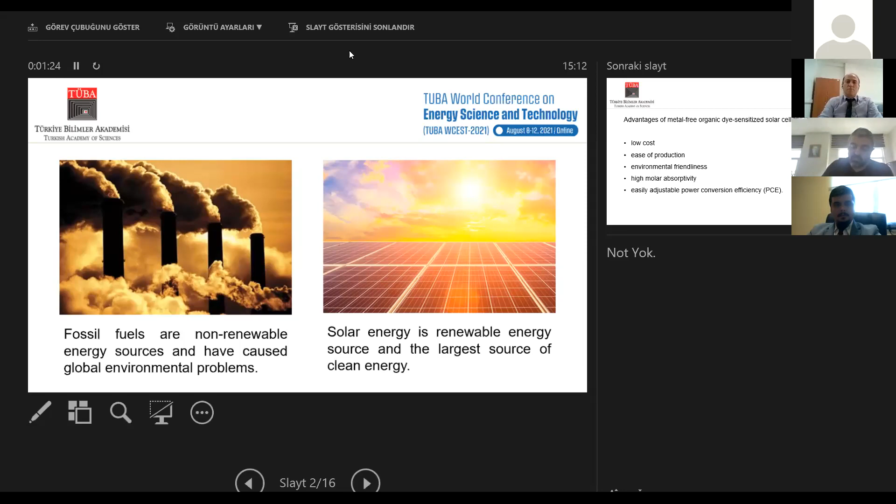For example, using less than 0.02% of solar energy would satisfy our present energy needs. The majority of commercially used photovoltaic panels are based on silicon. Metal-free organic dye sensitized solar cells have low cost, ease of production, environmental friendliness, high molar absorptivity, and easily adjustable power conversion efficiency. Thanks to these advantages, it has attracted attention as an alternative to silicon solar cells.

Conventional DSSCs typically contain 5 components: 1, a photoanode containing a conductive substrate; 2, a mesoporous semiconductor metal oxide film; 3, a sensitizer; 4, an electrolyte; and 5, a catalyst coated counter electrode such as platinum.

The molecular structure of dyes used as sensitizer is one of the main factors that affect the photovoltaic performance of DSSCs. A traditional organic dye is in the form of a donor-pi-bridge-acceptor, and the induced electron is transported from the donor to the acceptor by intramolecular charge transfer.

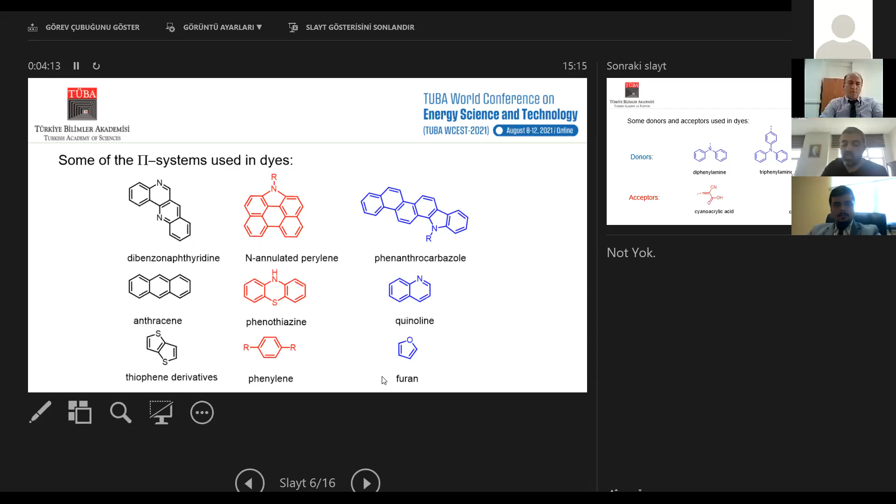In most D-π-A dyes, triphenylamine, carbazole, or diphenylamine electron-rich groups are used as electron-donating groups, and carboxylic acid or cyanoacrylic acid electron-withdrawing groups are used as acceptor-anchoring groups. The strong ester bond formed between the carboxyl group and titanium dioxide surface improves electron conduction.

Zhu et al. developed an efficient and stable new type of organic sensitizer in the D-A-pi-A structure by adding an electron withdrawing group to act as an auxiliary acceptor into the pi bridge of the D-pi-A structure.

In recent years, low bandgap electron withdrawing moieties such as benzothiadiazole, benzotriazole, quinoxaline, phthalimide, diketopyrrolopyrrole have been introduced between the pi bridge and electron donor, and D-A-pi-A dyes have been obtained. It was confirmed that the D-A-pi-A system increased the energy conversion efficiency and photostability of the DSSCs.

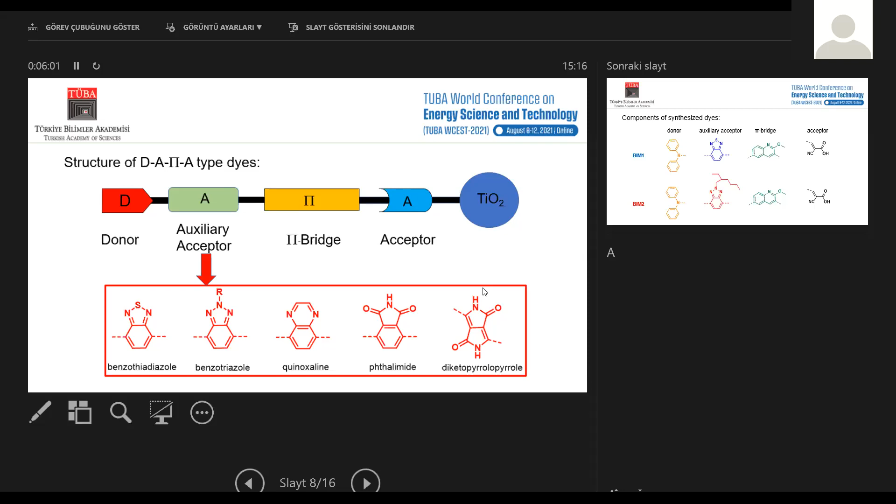In this work, we synthesized 2 dyes containing diphenylamine as donor, benzothiadiazole or N-ethylhexylbenzotriazole as auxiliary acceptor, quinoline as pi bridge, and cyanoacrylic acid as anchoring group. We compare power conversion efficiencies of the DSSCs when auxiliary acceptors are introduced into the structure of the dyes.

The molecular structures of the dyes we synthesized are shown in the figure. As can be seen, the structures are the same except for the auxiliary acceptor group. BIM1 and BIM2 dyes are both in the D-A-pi-A structure.

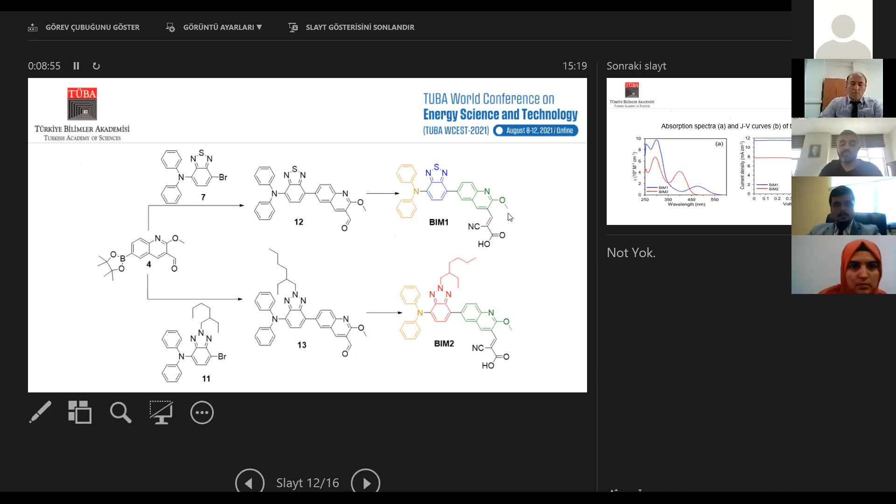The absorption wavelengths lambda max for dyes BIM1 and BIM2 are 476 and 400 nanometers. Remarkable redshifts observed for dyes BIM1 and BIM2 can be attributed to the presence of stronger electron withdrawing benzothiadiazole and N-ethylhexyl benzotriazole moieties on the dyes.

The power conversion efficiency of DSSCs based on BIM1 is much higher than that of BIM2 due to its broader absorption spectrum.

When compared to 5A-, 5B-based DSSCs in D-π-A structures in our previous study, it is seen that BIM1 and BIM2 based DSSCs have both redshifted absorption wavelengths and higher power conversion efficiency.

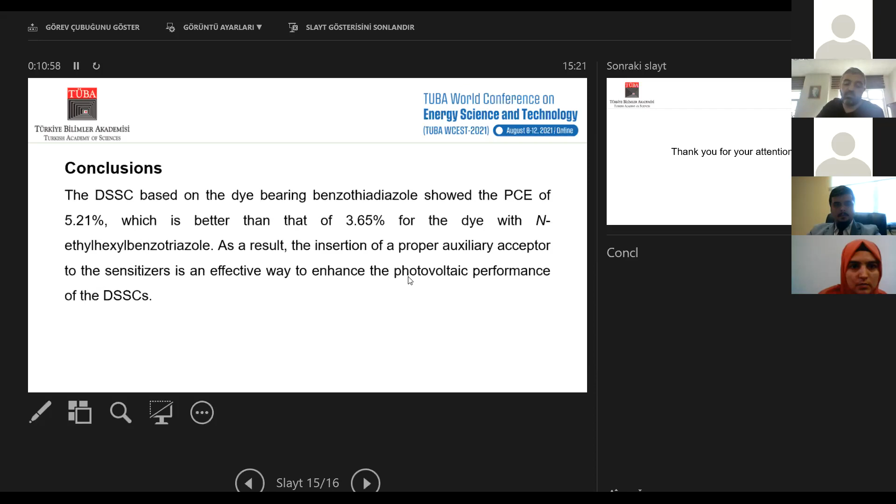Conclusion: the DSSCs based on the dye bearing benzothiadiazole show a PCE of 5.21%, which is better than the 3.65% for the dye with N-ethylhexyl benzotriazole. As a result, the insertion of a proper auxiliary acceptor to the sensitizer is an effective way to enhance the photovoltaic performance of the DSSCs.

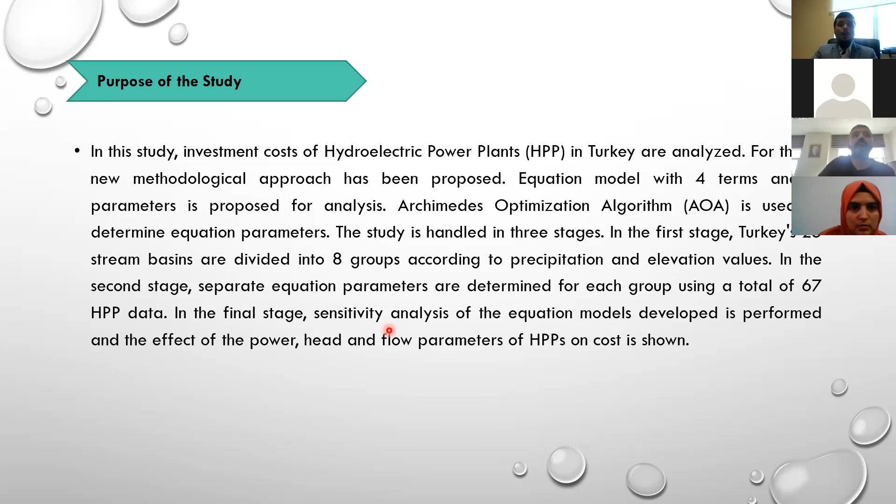In the first stage, Turkey's 25 stream basins are divided into 8 groups according to precipitation and elevation values. In the second stage, separate equation parameters are determined for each group using a total of 67 hydroelectric power plant data. In the final stage, sensitivity analysis of the developed equation model is performed, and the effect of the power, head, and flow parameters of hydroelectric power plants on cost is shown.

There are several reasons for these purposes. One of them is why did we do this study? Because of the importance of the hydroelectric power plant source, and to emphasize the importance of techno-economic analysis of renewable power plants. Current studies are unrealistic, in that electromechanical costs were used in the studies, or some parameters were neglected, or the classification was made according to the turbine type. Because electromechanical costs do not cover the total cost, this can give misleading information. So this study helps to fill the gap in the literature.

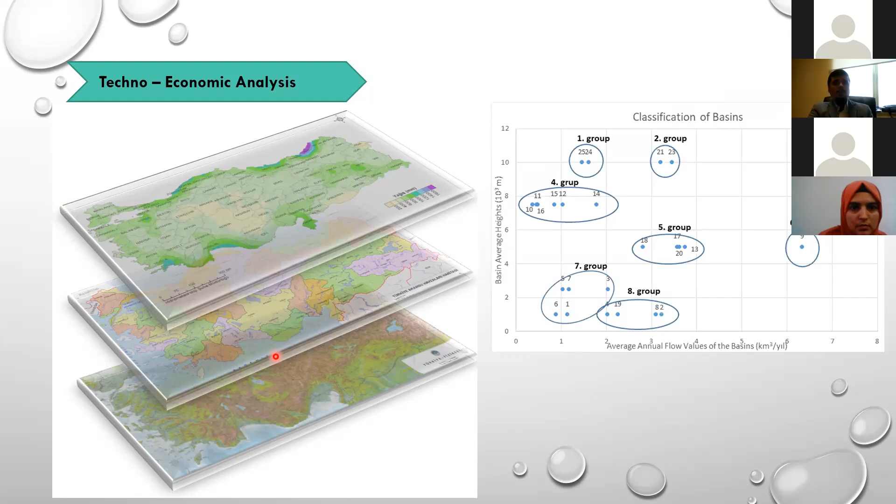The geography of Turkey consists of 25 river basins. When these basins are examined, although they have different river branches, the precipitation and altitude values of some basins show similarity. Taking this similarity into account, river basins are grouped, generally represented in the presentation equation. Turkey's river basins are calculated according to basin altitude and annual precipitation rate, so basins with close altitude and precipitation values are included in the same classification. In this case, there are 8 different classes.

The cost equation parameters were calculated for each of these classes. In the table, values are given as a result of the calculations made. The obtained results were then compared with the literature results.

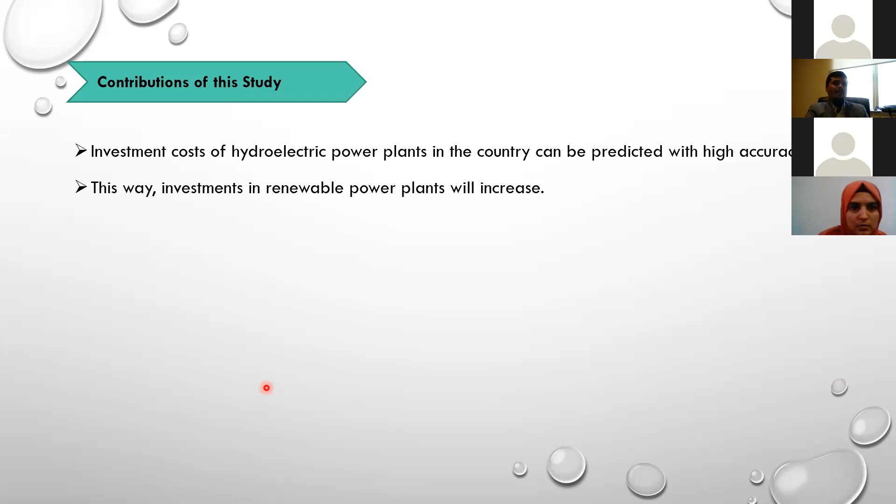The number of hydroelectric power plant data in the data pool can be increased, and parameters used in the proposed cost equations can be added or subtracted, and different optimization methods can be used. Different methodological approaches can be developed, and more tailored cost analysis can be made.

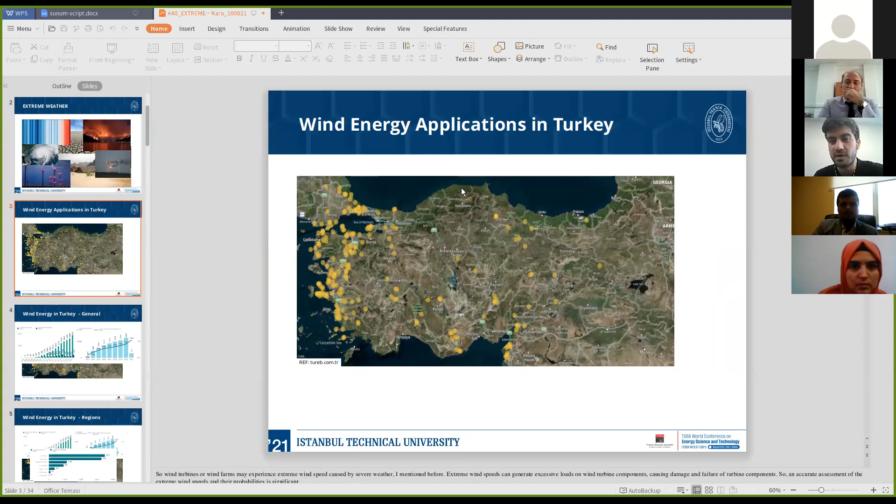Maybe I have some points. In Turkey, I can mention this figure. I took this figure from the Turkish Wind Energy Association's web application, which shows the wind energy applications distribution map in Turkey. The western part of Turkey is really windy, and there is a high number of wind energy investments made there. The yellow circles mean the wind farms. The other parts of Turkey also have wind farms. Okay, I will pass here.

Also, I can mention here the provinces of Turkey - Izmir, Balıkesir, Çanakkale, and Manisa - which have the higher installed wind capacity in Turkey. Izmir has close to nearly 20% of the installed wind capacity. Izmir is in the Aegean region of Turkey. Balıkesir and Çanakkale are located in the Marmara region.

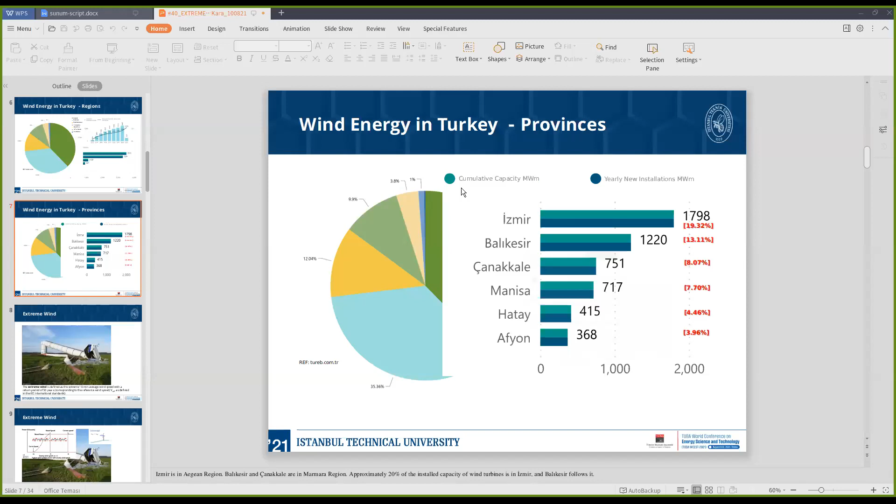The extreme wind is defined in this study as the extreme 10-minute average wind speed with a return period of 50 years, which is also defined in the International Electrotechnical Commission. It is also the standard for wind turbine design.

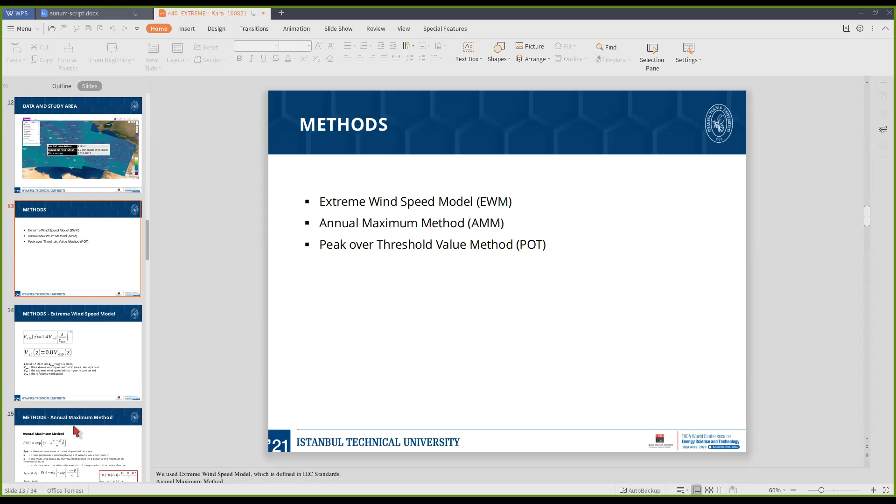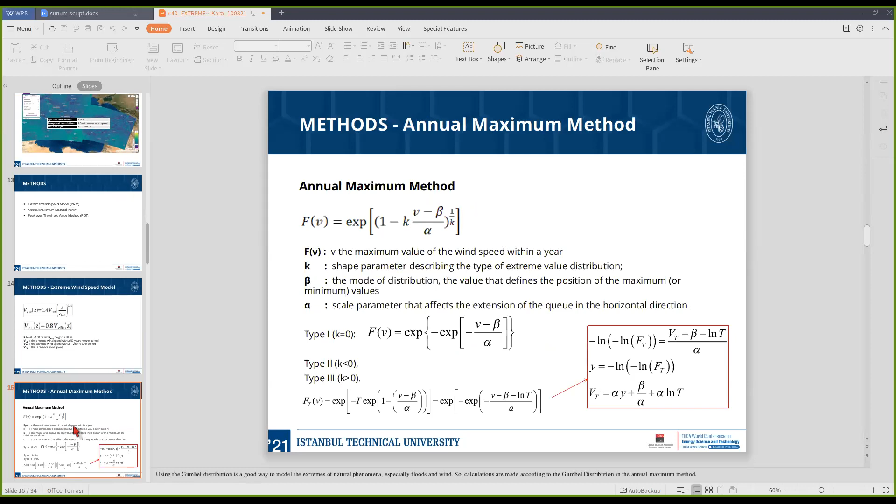The second one, the annual maximum method, using the Gumbel distribution, is a good way to model the extremes of natural phenomena, especially floods and winds. These calculations are made for the annual maximum method using the Gumbel distribution. The risk calculation uses this basic equation, which estimates the probability of occurrence of the return period during the operational lifetime of the wind turbine.

The last method is the peak over threshold method, based on the generalized Pareto distribution. We use this distribution to determine the threshold value. We used our software's functions in this study.

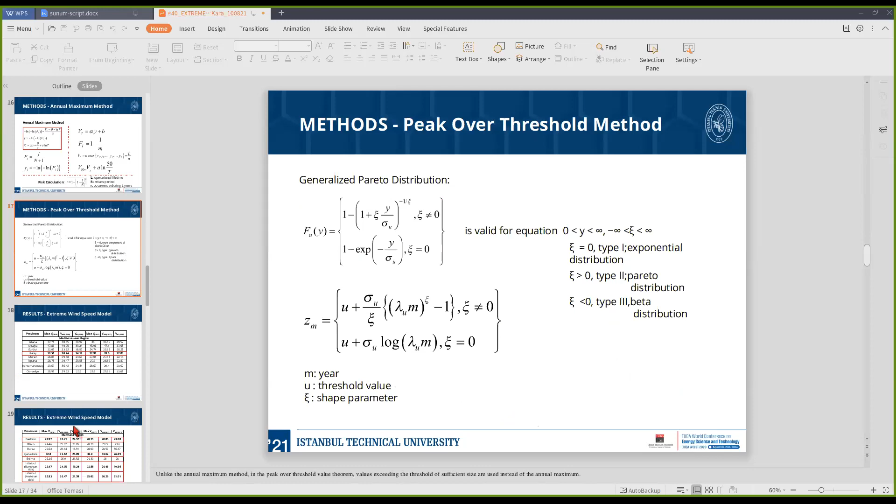Coming to the results of this study, I used the provinces where the installed wind capacity is higher in Turkey. Hatay is one of them. The maximum wind speeds in our data set are nearly 30 meters per second in 2016 and nearly 28 meters per second in 2017.

After the calculations based on that, using the equation I showed, the maximum extreme wind speed with the 50 years return period is 30.24 meters per second, which is below the IEC standard wind turbine class 3, because it's nearly 37.5. So the analysis from this perspective for this model.

Balıkesir and Çanakkale are other cities with high wind capacity. These are also not close to that wind turbine class standard. So selection of the wind turbine is based on these calculations. We can use the third class while deciding on turbine selection.

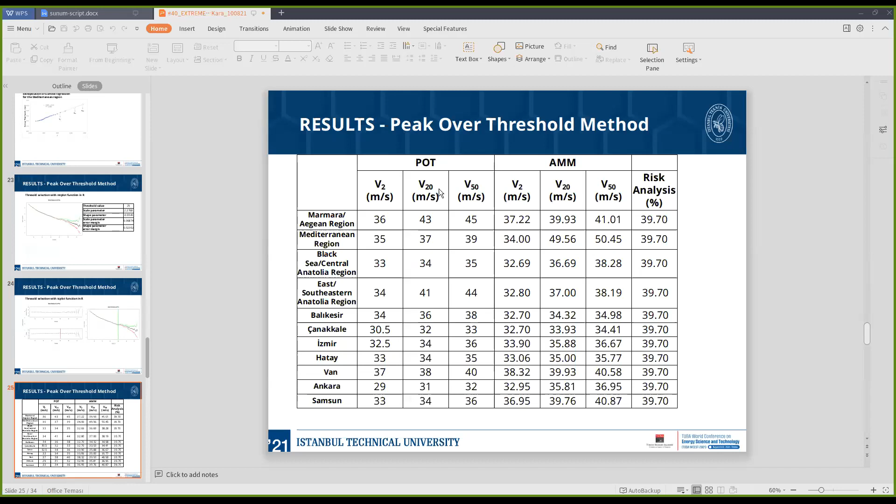But if we examine the AMM method, there is Van, and Samsun exceeds that wind turbine class 3. So if we choose the wind turbine according to these calculations, for Van and Samsun, we need to use wind turbine class 2.

There is a huge number of criteria for selection of wind turbines, of course, but this is a small perspective to understand the basic calculations I mentioned. Okay, thank you.

No, okay, yes, okay. So thank you for the presentation, it is very interesting. Unfortunately we don't have time for questions, but a very small question I want to ask: you have developed this model to select wind turbines, right? How much can this model be commercialized outside in the market? If investors or people dealing in this sector are interested to use your model, how can you make it widely accepted, or what is the problem if it is not?

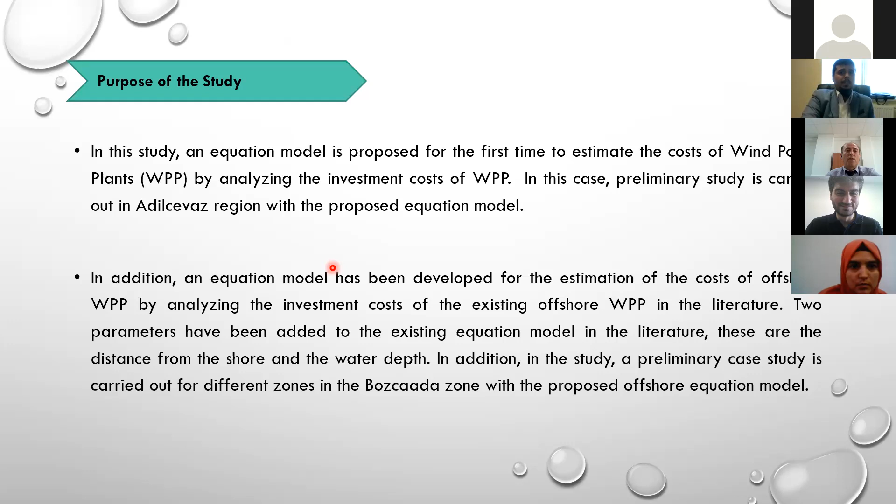In the study, an equation model is proposed for the first time to estimate the cost of wind power plants by analyzing the investment cost of wind power plants in Turkey. In addition, a case preliminary study was carried out in the Adilcevaz region to apply the equation model. The cost of the wind energy farm to be established in the designated area is calculated for different turbine models, and the appropriate turbine model is selected. In addition, an equation model has been developed for estimating the cost of offshore wind power plants by analyzing the investment cost of existing offshore wind power plants in the literature.

For the equation model, unlike the literature, distance from shore and depth parameters are also added. By analyzing the sensitivity of the model, cost changes for different parameter values are expressed. In the study, a preliminary case study is carried out for different zones in the Bozcaada zone to apply this equation model. The cost for different turbine models of the wind energy farm to be established in the determined zone has been calculated, and appropriate zone selection has been made.

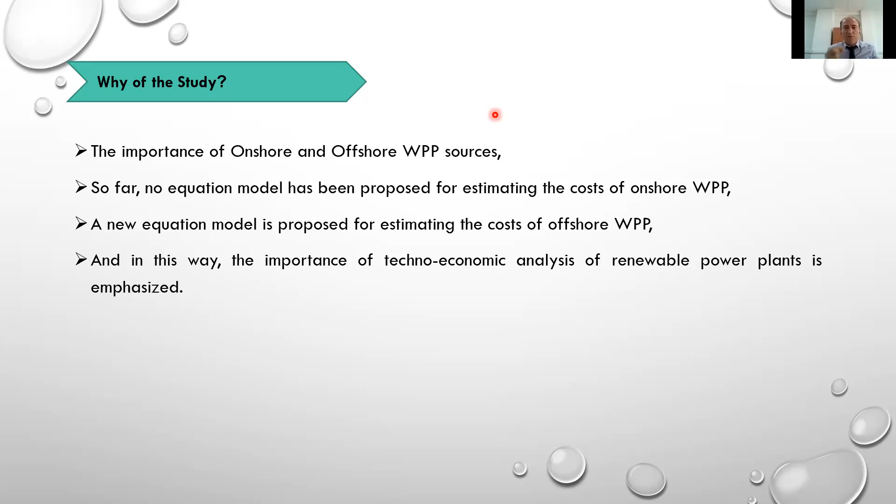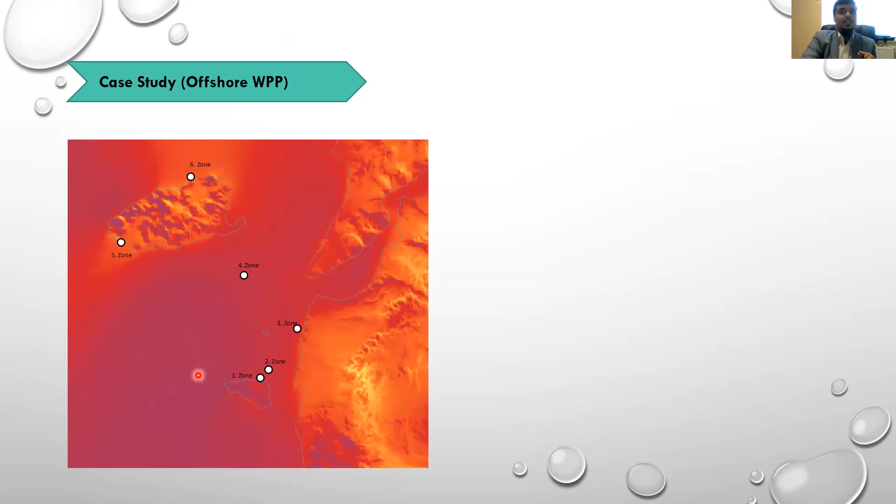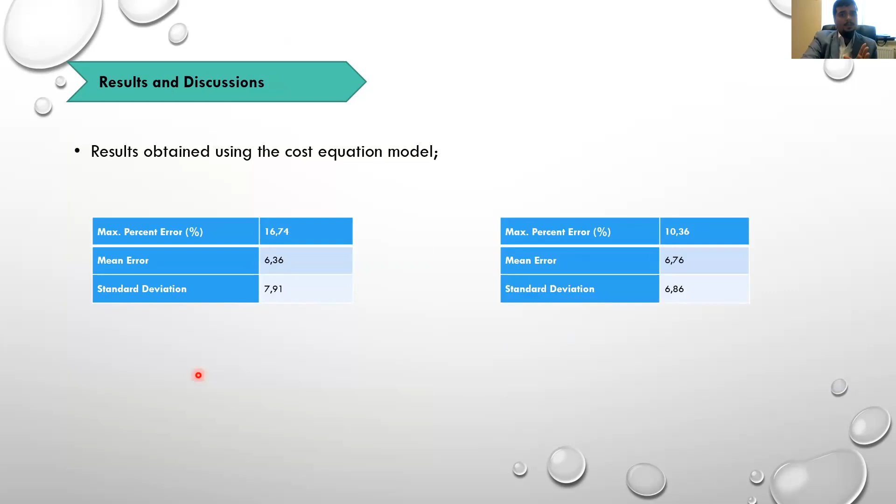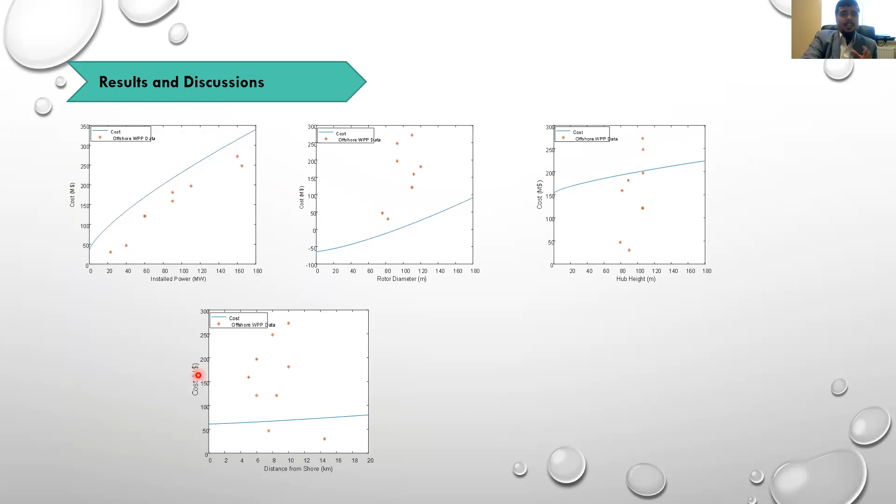In the sensitivity analysis, with the equation, in this study a cost equation is proposed for the first time for onshore wind power plants, contributing to the calculation of cost equation parameters using the Archimedes optimization algorithm. In the case study, calculations are made for the Adilcevaz region.

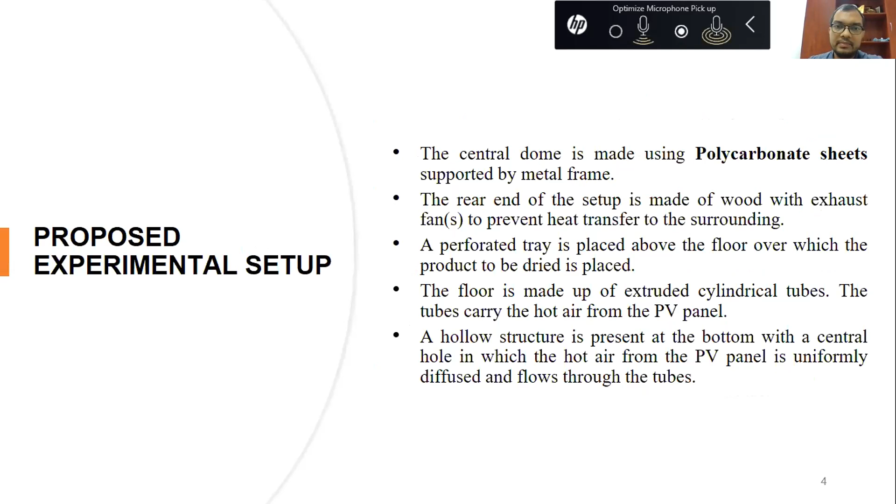This is the experimental setup which already exists, people are working on that, but it is not self-sustainable because we cannot run it in forced mode. So if you want to extract more moisture content, we have to go for some other alternative. What we have done is connect this dome type greenhouse dryer with the PVT collector.

So this is the structure, and here is the PV collector. Why have we taken a PV collector? So that apart from the heat energy, extra heat energy can be fed to this dryer, and we can also run the DC fan. The beauty of the DC fan is that it operates according to solar radiation.

For example, if solar radiation is more, we have more evaporation inside the dome, so we have to take it out quickly from the dome. Otherwise it will accumulate and reduce further moisture evaporation. Due to the PV cell, if radiation is more, it produces more electricity. If you have more electricity, the fan rotation will be more, and it will take out the moisture content at a faster rate. So it is some kind of self-sustainable system.

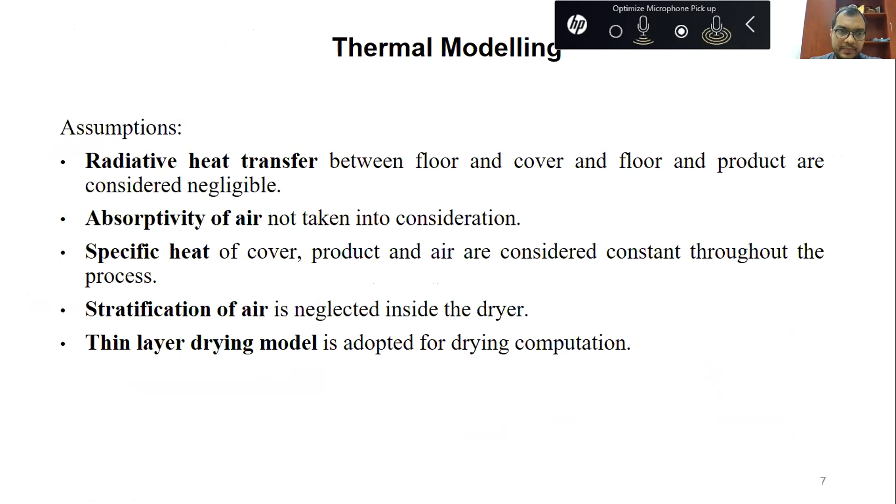According to moisture, it can adjust itself. For that we have done some modeling. First we made an equation for this dome structure, then we made an equation for the PVT collector and connected both of them. Finally we got the results in terms of different temperatures, and from different temperatures we can calculate other energy parameters.

In case one, thermal modeling for the solar dryer: we have done the energy balance equation, then the energy balance equation for air inside the dryer, then energy balance equation on the product, then energy balance on the floor, and the mass balance equation. We have 5 equations which we can solve with the help of a MATLAB program.

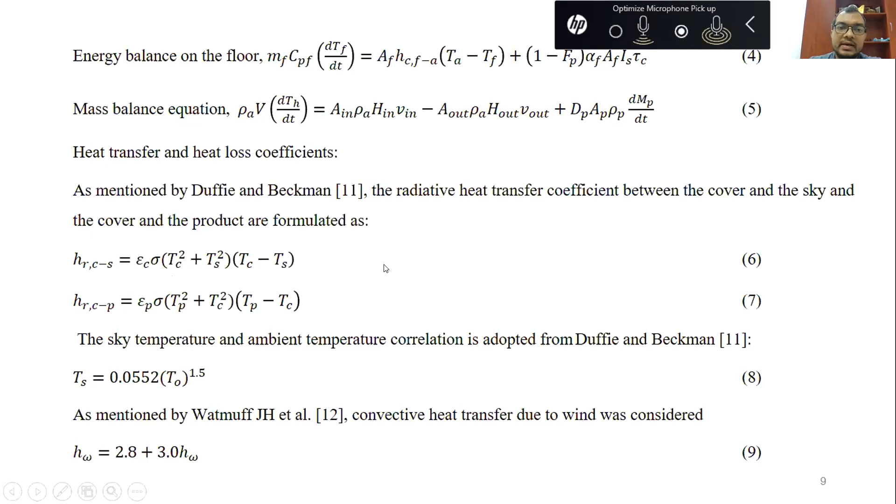To solve this equation we require different heat transfer coefficients, which can be further calculated with the help of different correlations available in the literature. So now we can calculate the heat transfer coefficient, put in the values, and get the solutions.

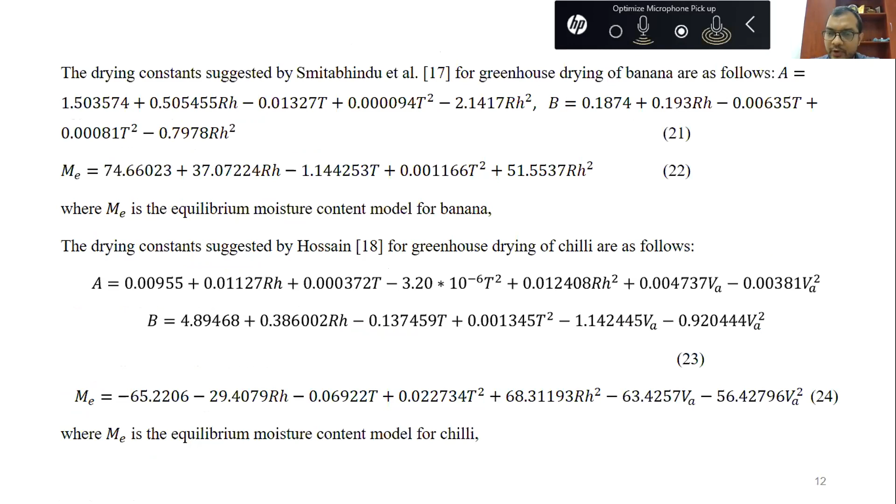For moisture ratio we have different correlations for different crops like banana and chili, and different models. We have taken 3 of these models and compared how the moisture evaporation behavior is going on. Then in case 2, we took the dome structure connected with the PVT air collector system, and this is the energy balance equation for the PVT air collector.

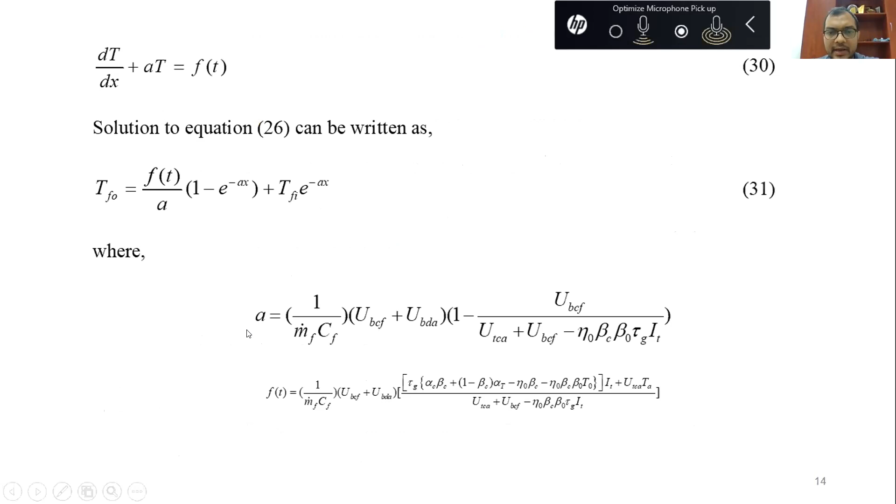Finally, this is the equation for cell temperature. In the same way, we got the equation for the exit temperature from the air collector. This is a first order differential equation which we have solved again with the help of MATLAB programming, and further we can get the different energy parameters.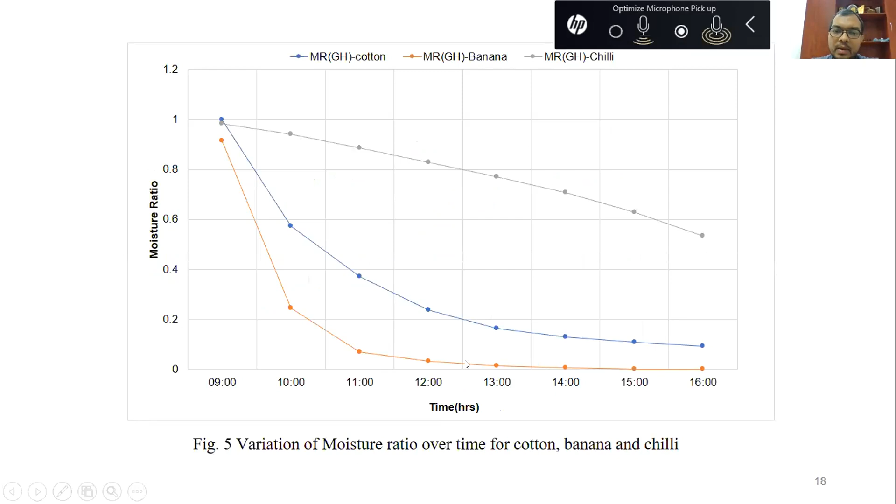What we find is we got around 10 to 15 degree average temperature difference from the ambient temperature when we have taken just the dome structure. Then moisture ratio we have calculated for cotton, banana, and chili. If you see, banana drying takes less time compared to the other two.

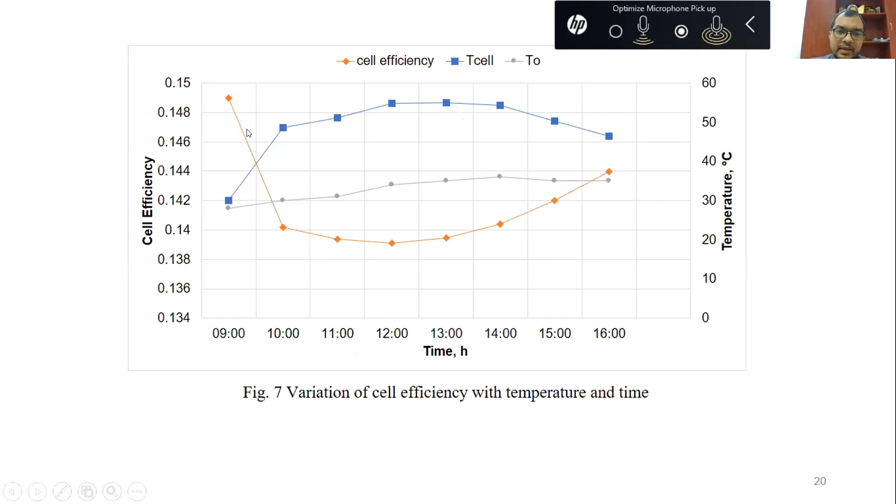Now we have compared with PVT, which we have connected, and we got further around average 15 degree temperature enhancement. So effectively, compared with ambient temperature, the temperature difference is around plus 30 degree average. Also we got a very interesting result: when we have seen the cell efficiency, as the ambient temperature or cell temperature used to increase, the cell efficiency used to decrease.

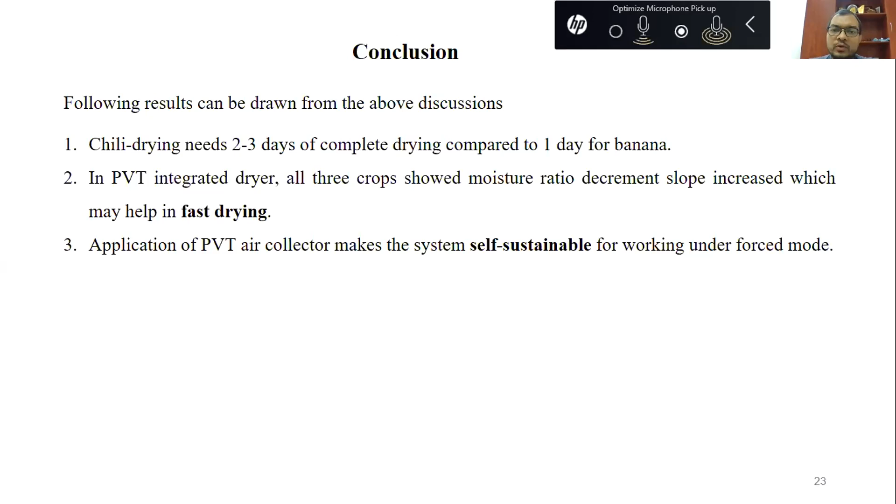In PVT integrated dryer, all 3 crops showed moisture ratio decrement slope increased, which may help in fast drying. Application of PVT air collector makes the system self-sustainable for working under forced mode. Further, we want to extend the dome by putting PCM material, phase change material, so that drying can be used at nighttime also when solar radiation is not available. These are the references, and thank you.

Thank you, Mr. Tiwari. It was a very interesting presentation with the experimental data you employed. Also you mentioned the phase change material, because we had a presentation today about using a PCM for this type of system. Very interesting study, I really appreciate your report and your study. Unfortunately we don't have time for questions. Thank you so much for inviting. No, it was great. We thank you, and we hope to have you in the next events that we will have hopefully. I thank you again.

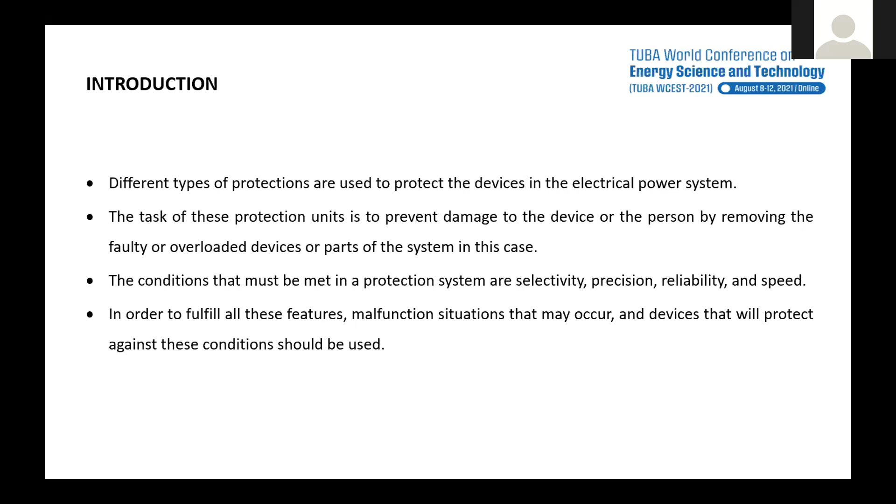The conditions that must be met in the protection system are selectivity, precision, reliability, and speed. In order to fulfill all these features, malfunction situations that may occur and devices that will protect against these conditions should be used.

Recently, new protection systems are needed for the problems of the safety equipment in the power systems in terms of reliability and speed, and for the needs of developing smart grid systems.

In recent years, especially with the development of the smart grid concept, the visible light communication system, VLC, has come to the fore with its reliability, significantly higher data rate, and new generation technology that consumes less bandwidth in data transmission. Highlight of this paper: we improve a smart communication substructure for microgrid systems by using the VLC system instead of radio frequency (RF) systems or power line communication systems.

The main contributions of the paper are summarized as follows. We propose a VLC transceiver system that uses an 8 IPPM technique to provide the data transmission. We describe a data mapping method for fault condition, voltage, and current amplitudes.

In our scenario, the fault detection is carried out at the transmitter side. The type of fault is transmitted to the receiver using a data package which consists of 8 bits. 4 fault conditions, defined in IEEE 929-2000 as over voltage protection, under voltage protection, over frequency protection, and under frequency protection, registered in a package using an improved fault coding method. 4 code streams are generated to define the type of fault.

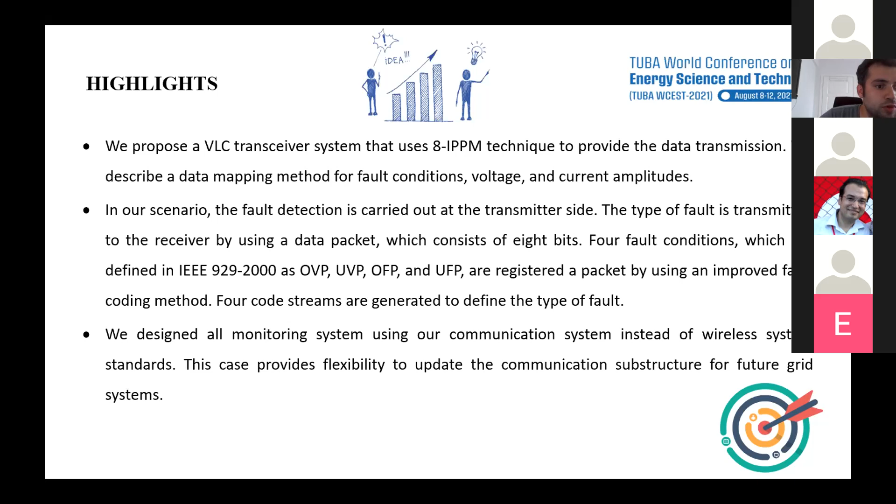We designed the monitoring system using our communication system instead of wireless system standards. This case provides flexibility to update the communication substructure for future grid systems.

In this study, grid voltage and frequency information were obtained in real time via VLC using the LabVIEW software interface developed based on FPGA, using a microgrid processor. The voltage and frequency obtained were experimentally verified with the modulator and demodulator designed based on VLC.

The signals to be transmitted to the circuit breaker were checked with the developed VLC-based system in order to disconnect a system connected to the grid during voltage and frequency imbalances. Thus, an innovative method that enables a communication override, which prevents switching and data losses, has been developed. Thanks to this structure, a technological system has been proposed that can be applied in practice, especially for innovative protection methods required for smart grids.

Background: VLC, visible light communication, is a promising technology for wireless optical communication systems. Compared with radio frequency communication, VLC systems are not affected by electromagnetic interference. Thanks to this characteristic, VLC systems are very appropriate for electrical substations and electrical generation systems where intense electromagnetic radiation is present.

Proposed method: in the test system, the output of the PV system is connected to the grid via a full bridge inverter. Inverter output is filtered and connected to the grid via a circuit breaker. There is a parallel RLC load at the PCC, the point of common coupling. By using the voltage information at the PCC point, the protection process is carried out with the proposed method.

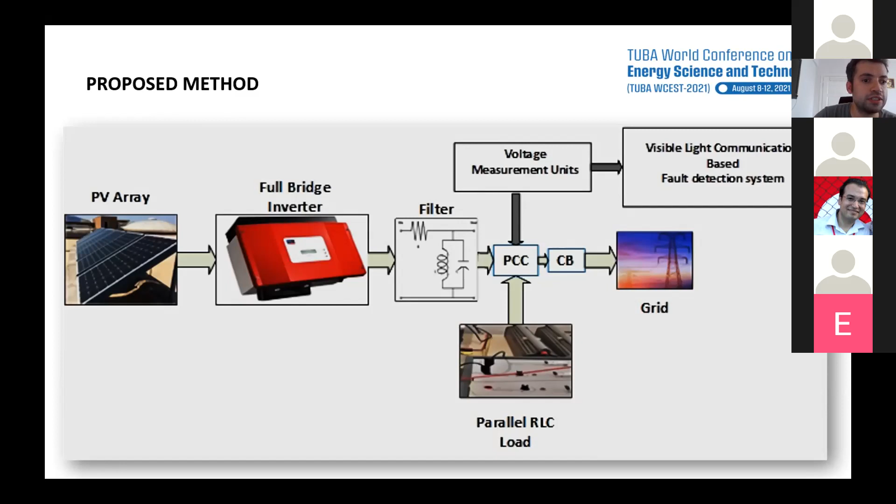The modulation and demodulation of the signal is created with lines of code written in VHDL language. The IP generator block was used in the LabVIEW FPGA part to add the generated code to the interface and upload it to the myRIO card with block diagrams.

In visible light communication, VLC, LEDs are used as transmitters because of the low cost and high energy. On the receiving side, photosensitive photodiodes are used, and regulator circuits are part of these systems.

In this study, four conditions for protection are discussed: first, over voltage protection (OVP); second, over frequency protection; third, under voltage protection; and finally, under frequency protection. These are the concepts of protection. The system tolerance of negative or positive 10% was determined for this study.

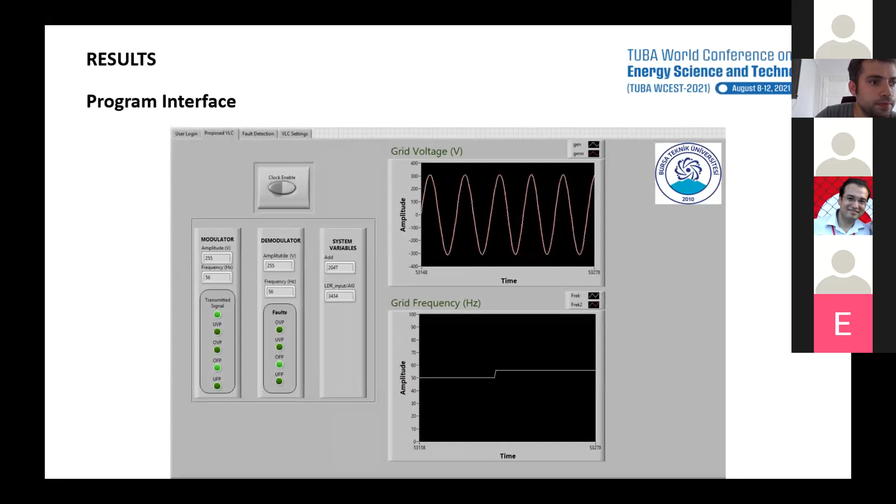The program interface is shown in this figure. For the over voltage protection, OVP condition, when the voltage value exceeds the specified limit value according to IEEE standards, the LabVIEW interface shown here clearly shows the breaker opens when the voltage value exceeds the specified threshold value.

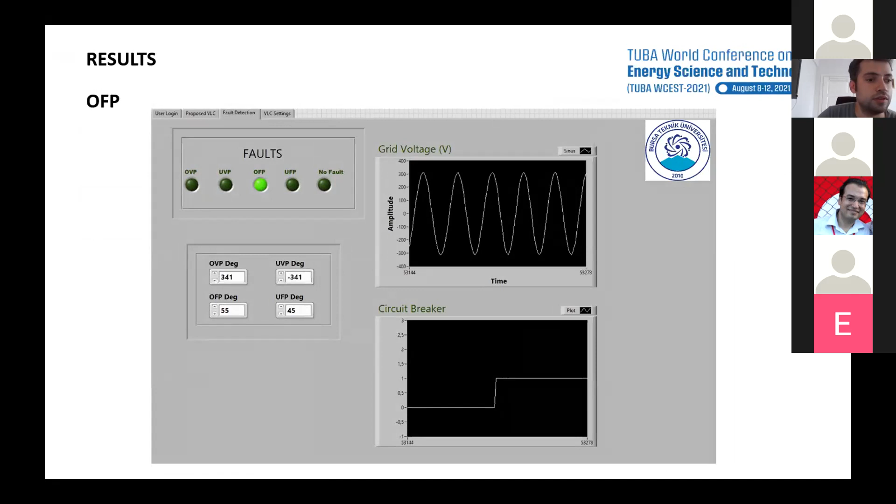For over frequency protection, the LabVIEW interface shown in the figure demonstrates this case: when the frequency exceeds the specified limit value, the circuit breaker opens, and this fault is detected properly again.

In the graph, the part where the circuit breaker is activated is shown as a result of a 10% increase in the grid frequency. The grid frequency chosen in this study is 50 Hz, and it goes to 55 Hz, at which point the circuit breaker opens. This is shown in the table and graph.

In conclusion, a smart breaker with VLC, which has the advantage of high data rate, is safe, has signal isolation and compact structure with very large bandwidth, and consumes less power in data transmission, is proposed for protection in the power system.

Grid voltage and frequency information was acquired in real time with VLC using LabVIEW software, with an interface developed based on FPGA. An innovative method has been developed that provides communication over light, preventing switching loss and data losses. Thanks to this structure, a technological system has been proposed that can be applied in practice, especially for the innovative protection methods required for smart grids.

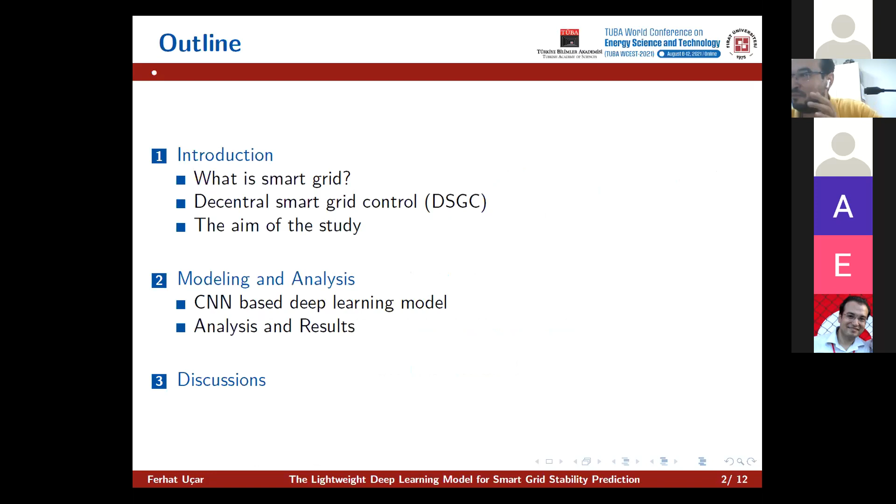This is the outline of my presentation. Because the time is delicate, I'm going to be a bit fast. Thanks for understanding.

First of all, everything goes to smart. Everything has an intelligent side nowadays. It's very famous being a thing with a smart proposition or smart adjective. And also our electrical grid needs to be smart, because a smart grid, first of all, is a state-of-the-art power grid framework, and it also manages renewable energy source integration, and allows electricity flow in both directions. Today everything is different from yesterday. Consumers also produce electricity and sell it to production companies, giving their energy to the grid, and the management of the energy is very important. The smart grid takes the scene at this time.

First of all, I would like to draw your attention to grid stability. What is grid stability? The first thing that comes to mind is there is an equilibrium between production and consumption. We have to provide this. Because electricity cannot be stored in the transmission grid, we have nowhere to store it. So the amount of electricity fed in must always be the same as the amount fed out. This means production and consumption of energy must always be balanced, and we understand this from the value of the frequency. The primary control in our power plants is made through this frequency control.

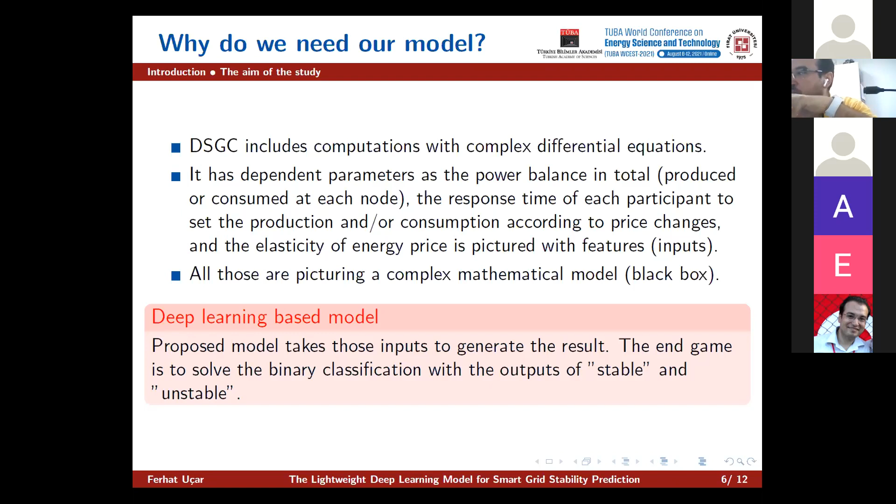Our proposed model includes a lightweight convolutional neural network. Why do I determine it as lightweight? Because it's built from scratch. It's a very easy structure to build, and it's not pre-trained. It does not use pre-trained networks, because those have very heavy computational costs. Our contribution here is building a lightweight

convolutional neural network, which we'll call CNN from now on, to design a lightweight CNN to predict smart grid stability. This deep learning based model performs well in this stability assessment, using a comprehensive smart grid stability public dataset, which helps us picture the performance in a good manner.

The CNN model is very simple and built from scratch, as I said. It has only one convolutional layer and fully connected layers at the end, and it just makes the prediction of stable or unstable. Generally, CNN is known for using 2D images, but here we designed a 1D form of it, because it's a 1D signal, not image processing.

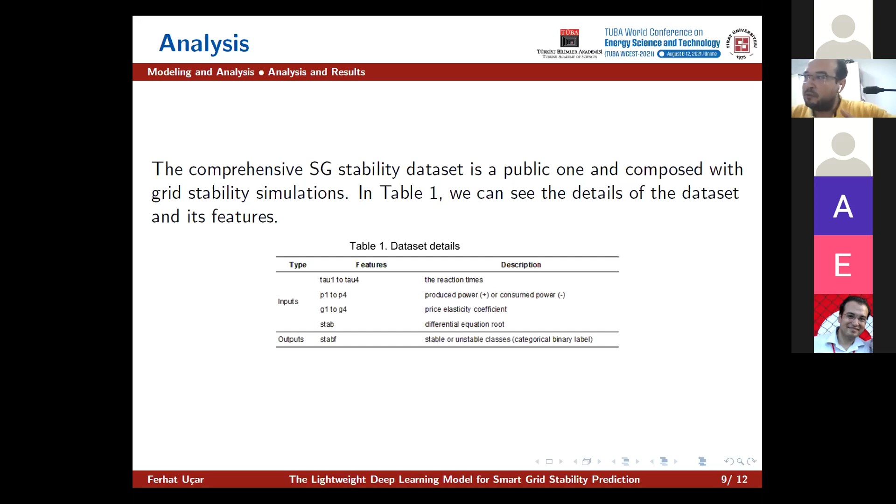So our deep learning based model learns the black box. We don't know the complete complex computations in it, and we shouldn't need to know it—our model learns it. This is the classic neural network logic, as everyone knows, and our output is the smart grid stability prediction.

When it comes to results, the experimental analysis was done in Python, using the PyTorch package, which has automatic parameter tuning built in. The performance evaluation metrics here are accuracy, sensitivity, specificity, and precision, and also

F1 score as our last evaluation metric. You can see here it reaches very good performance values—accuracy, sensitivity, specificity, precision, and F1 score all close to 1.

As a conclusion, our proposed model reached an accuracy value near to 1, the maximum value, just using a lightweight 1D CNN structure. In the extended paper, you can see we had a benchmark study that reaches nearly our results, but with a complex classifier model. Our model is very simple and very cost effective.

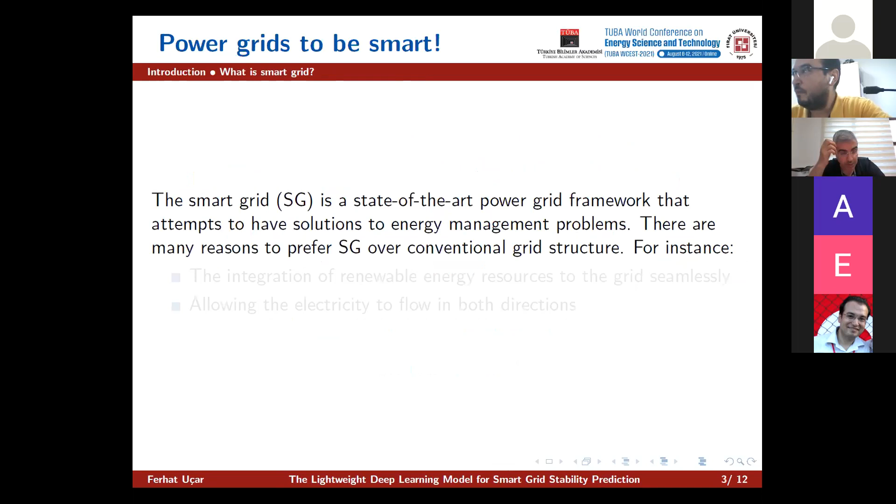I have one question, actually. When you were presenting at the beginning about the balance of the power system, as you know, the balance can be divided into two main parts: one is the frequency balance, the second is the voltage balance—I mean the active power balance and the reactive power balance. In your model, did you consider both, or did you just use one of these? Did you consider both?

I don't consider the power side, actually, because the public dataset is ready to use, and they made the experiments considering the voltage stability and the grid stability, the bigger picture, generating the outputs according to their inputs about nodes.

And so I'm restricted to these data sets, and I don't consider the reactive or active power, I mean frequency stability and the voltage stability. Did you consider both? Okay, then you use both active and reactive power stability as well. Okay, relatively. Yes, I see. Thank you, Ferhat.

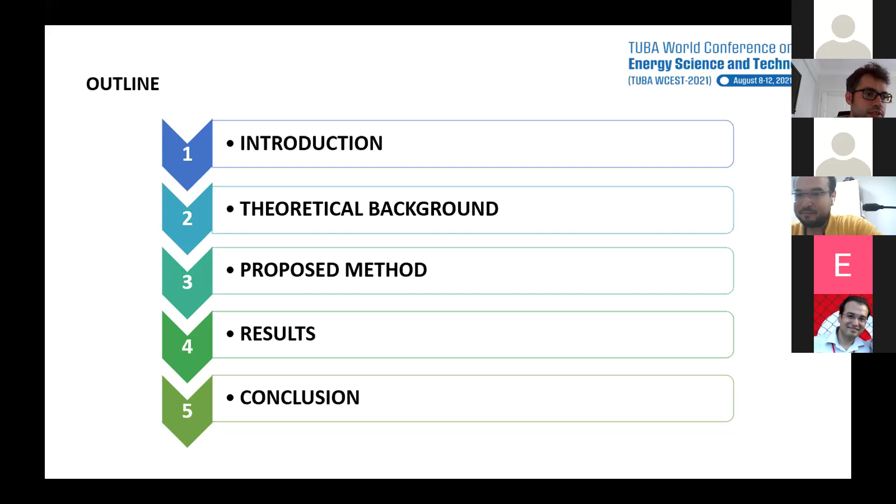Sustainable power flow is required for both the consumers and grid side to provide a reliable grid integration, especially in microgrid structures, for example SOFC systems, PV systems. Especially on the production side, there are renewable energy sources such as fuel cells, wind turbines, grid-connected photovoltaic systems. On the consumption side, there are loads such as electrical vehicles, fuel cells, nonlinear loads, and their number is rapidly increasing also. This situation brings important changes in the traditional grid structure.

Among the renewable energy resources, fuel cells stand out with the development in recent years. The integration of hydrogen energy-based systems, for example SOFCs, whose number is rapidly increasing, and its effects on power quality have become an important issue.

Highlights of our method: a new modified weighted majority voting mechanism is proposed to classify complex power quality disturbances in hydrogen energy-based systems in the literature for the first time. Different deep neural network models are used for classification: deep convolutional neural networks, deep long short-term memory, and its hybrid model. There are 3 models investigated in this study.

Existing machine learning methods are compared with deep learning and our proposed method under noisy and noise-free conditions. The classification accuracy under low level noise and high level noise conditions is respectively higher than the other methods in the literature.

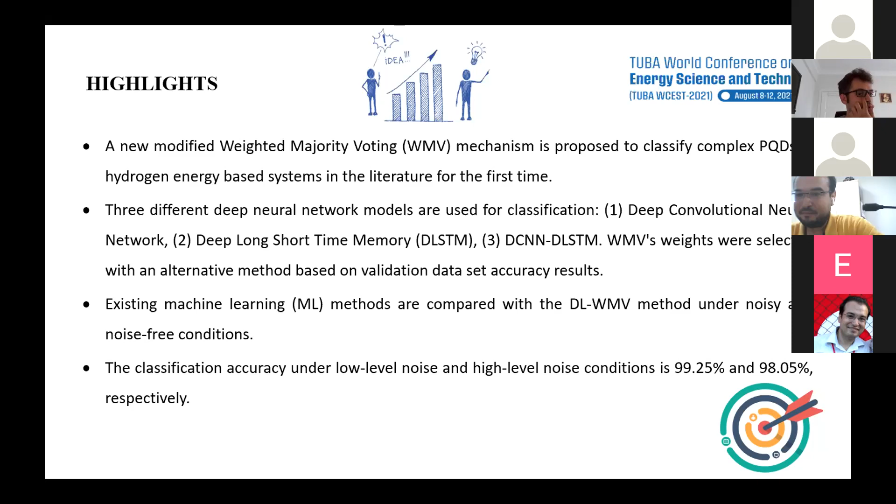In previous studies, automatic identification of power quality disturbances was divided into 3 stages: signal analysis using time frequency analysis methods, for example Fourier transform, wavelet transform, S transform, Gabor filters; feature selection using optimization methods; and event classification using multi-class classifier. There are 3 stages.

Power quality is directly related to voltage and current characteristics, and a problem that leads to deviation from the ideal waveform is called the power quality disturbance. The problems occurring in hydrogen energy-based microgrids show similar features to conventional systems. However, these events in these applications are more challenging to identify than in traditional power systems.

As with conventional systems, short circuit faults, large power loss, and large capacitor banks will lead to transients, sudden current and voltage rises, voltage fluctuations, and harmonics in the microgrids. On the other hand, some situations cause power quality disturbances specific to microgrids, such as enabling or disabling distributed generators like solid oxide fuel cell systems, PV systems, inverter control strategies, operating mode switching, and the presence of nonlinear loads.

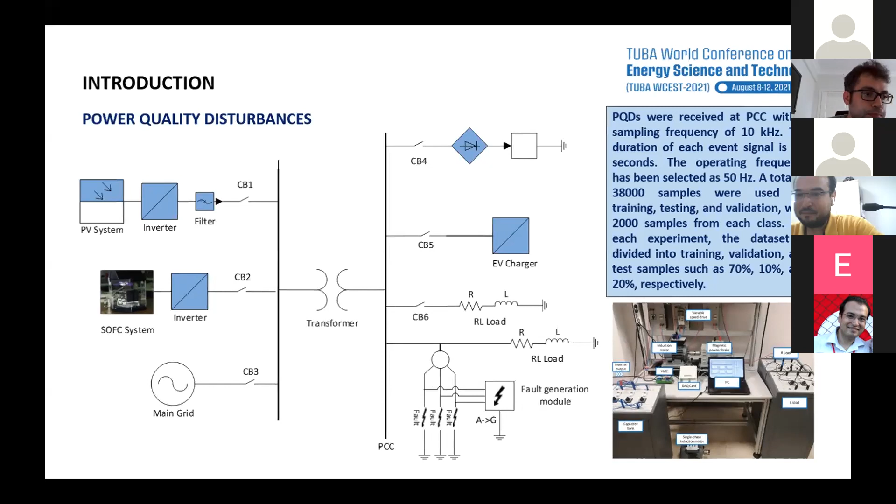For theoretical background, we use 3 models. The first model is the deep CNN model. Several models have been formed in this work by changing various parameters such as ordering layers in the deep CNN structures, filter dimensions, activation functions, kernel dimensions, and optimizer functions.

The long short term memory models are a type of recurrent neural network, called LSTM. LSTM models are designed to overcome the vanishing gradient problem. Models using multiple LSTM layers are called multi-layer LSTM or deep LSTM, which we call DLSTM in this study.

What are the differences between our method and conventional classification methods? Conventional automatic identification methods of power quality disturbances generally have 3 stages, and these design analysis methods have heavy computation burden. Besides, these methods are prone to being affected by noise signal, and the optimization process of feature selection is complicated and time consuming.

In this study, a hybrid model using a multi-class classifier with the 3 models we investigated is shown in the flowchart figure. We use 2 voting methods: the classical voting method, and the second one, weighted majority voting method, our proposed method. Weighted majority weights were selected with an alternative method based on validation dataset accuracy results.

For every classifier, we analyze the classification accuracy rate for every class, and the most confused classes for every classifier are determined. For these classes, the weights of the classifier are decreased. Also, weights are increased for the best predicting classifier.

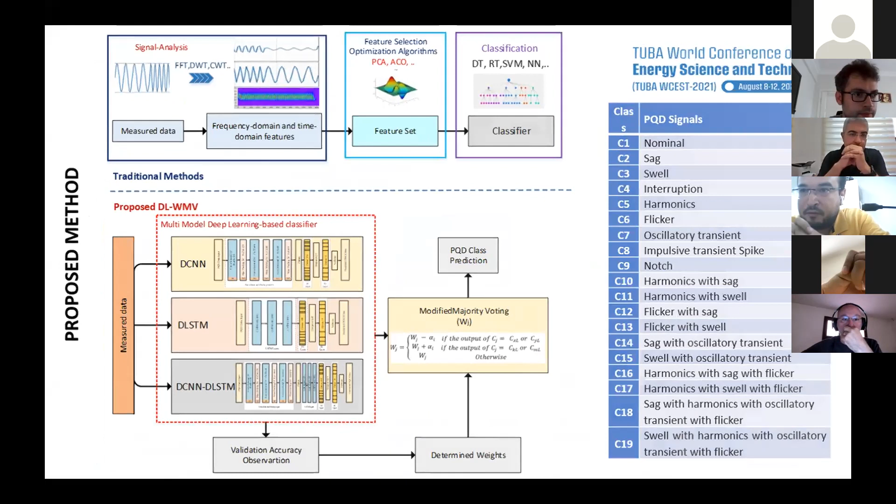Did you convert them to image or just reshape the signal? Just one signal, not image. I saw that you used 2D CNN construction, so you're supposed to have converted them. Maybe this is an error, we use 1D signal. In the figure, I saw 2D, and I thought you reshaped it. That may be 1D, sorry for that, this must be 1D. Yeah, I thought you were reshaping them.

And my last question is... thank you for your attention, sorry for that. Is the proposed model a bundle model? I mean, it includes 3 types of classifier. You use both of them, and yes.

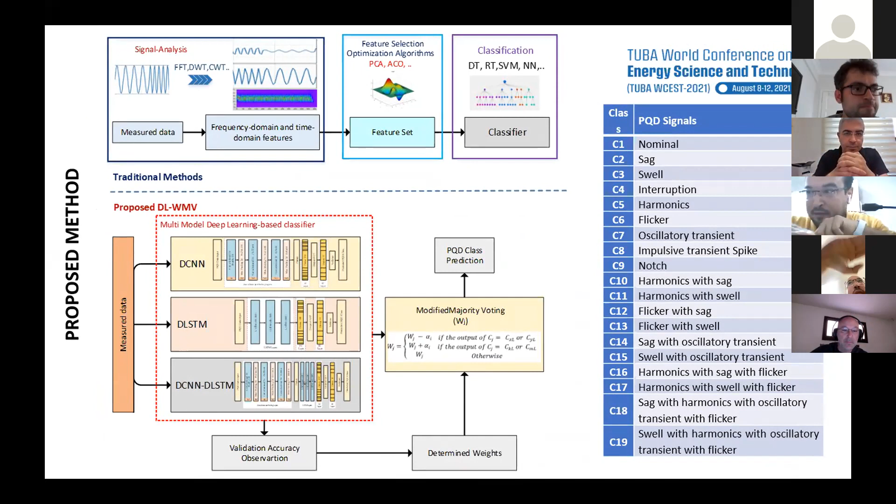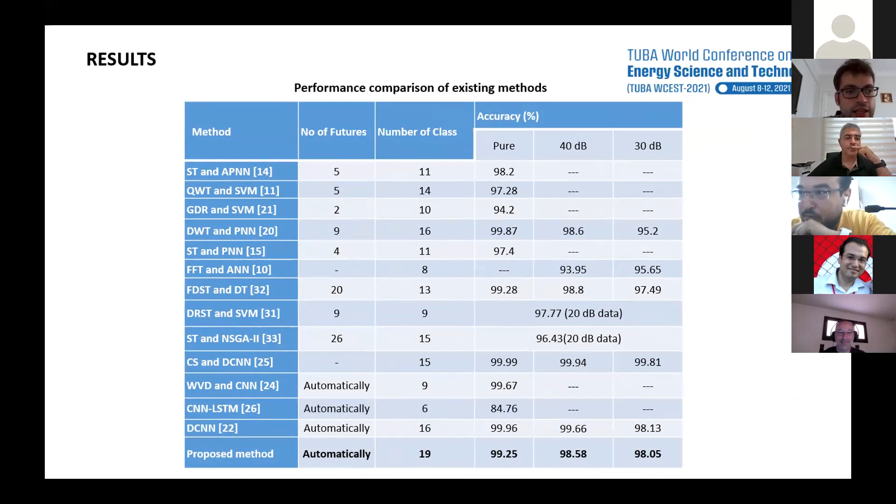I think your algorithm runs all of 3 models and takes the maximum, the winning model. I don't understand that. Yeah, we use validation accuracy rate for each class, and we choose the best predicted classes and most confused classes. For example, deep CNN neural network has the best accuracy, we use it, or if DLSTM has best accuracy, we use it. Winner takes all.

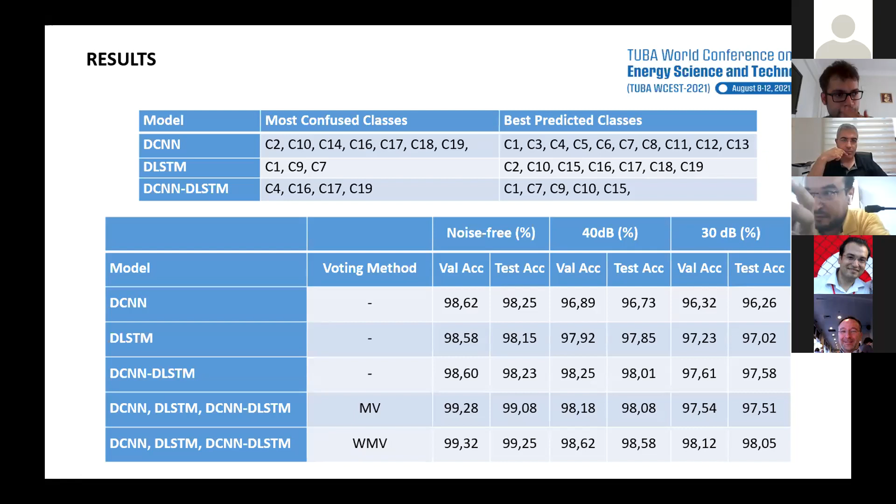Winner takes all, yes. The coefficients decrease and increase, we choose the best one, and that one classifier is applied to the signal. So when you give the final model to the end user, the algorithm gives all 3 models and says run all of these 3, and our algorithm, but the perfect one is selected for classification accuracy.

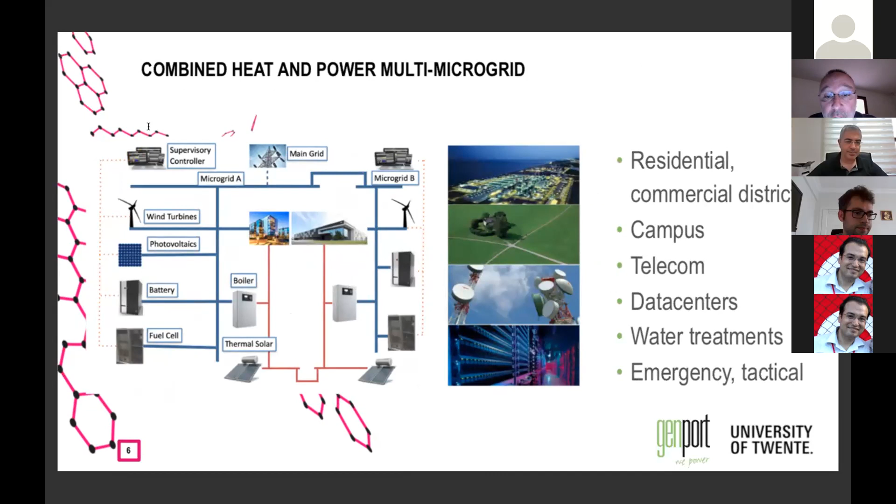Where these two microgrids can exchange energy, and my aim is to study this type of technology, finding if there are best configurations, best fitting to find a large application in the future in many industrial and commercial applications.

However, as we know, microgrids are a challenging technology. In order to find the best sizing, the best configuration, the best location, you need to overcome and solve many challenges and find the optimal configuration among the quality of energy, the norms, the reliability of the grid, and so on. So you need high computing resources to obtain an answer to this problem.

In my work that I will explain, I've basically focused on finding an optimal design and sizing of microgrids and operation simultaneously.

And as a fitting estimator, I utilize the internal return rate combined with levelized cost of energy, that returns a ratio between the total cost of ownership and the energy generated by the microgrid.

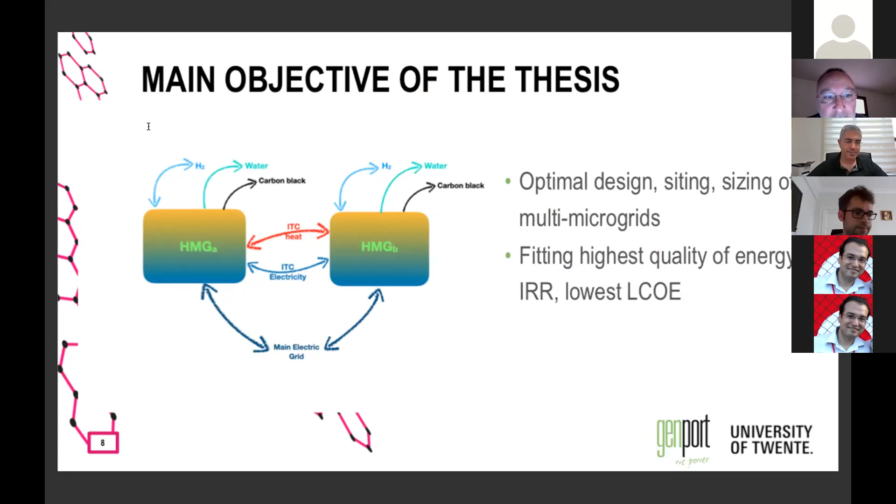And as products that are exchanged among the microgrid and the main grid, we consider electricity, heat, but also hydrogen, which can be produced on site, and other byproducts like water that can be generated by the fuel cell, or carbon black that can be utilized by a thermal plasma decomposition system.

So the overall configuration is shown in this picture. On the red line are interconnected different distributed energy resources like solar panels, wind turbines, fuel cells, battery energy storage systems, and heating systems like electric boilers, heat pumps, thermal collectors, and so on.

And they can exchange energy between the two different thermal and electric microgrids to find the best optimal energy cost.

One moment. Okay. Now, to solve these complex problems, I developed a novel two-layer optimization algorithm.

At the upper level, a new evolutionary algorithm supported by a machine learning algorithm delivers a trial setting of configuration, sizing of distributed energy sources, and best candidate locations.

And the lower level utilizes these settings to estimate the optimal energy balance at the minimum cost with a sequential least squares algorithm.

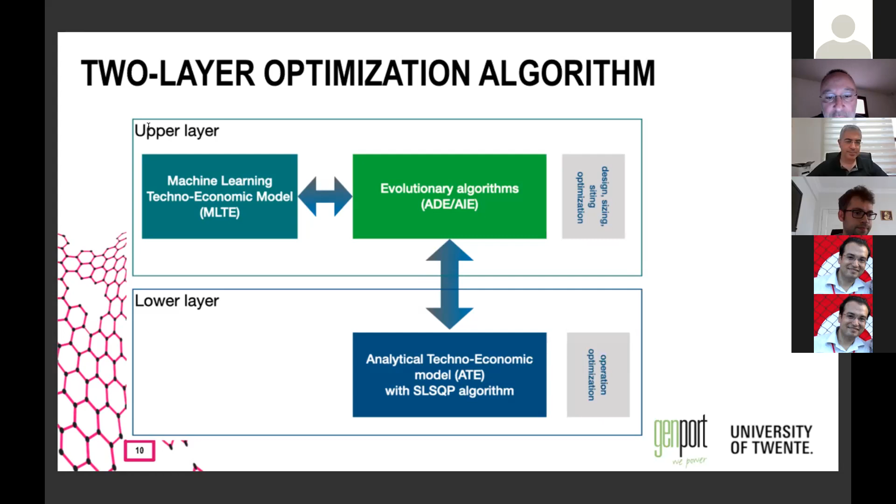The objective equation for the lower layer is a combination of the revenue stream and the cost. So I need to minimize these functions by balancing the energy flows every time step, while the fitness function for the evolutionary algorithm is a combination of the actual levelized cost of energy and the internal return rate.

The most interesting aspect of the evolutionary algorithm is a novel technique for the development of mutant and trial solutions. I've been inspired by the COVID era, by how the immune system reacts against antigens.

So basically, the mutant evolving strategy is always managed by the diversity of the population of solutions, while the crossover recombines the mutant with target vectors using two different techniques.

The traditional vertical gene transfer, and the most unusual but existing in nature, horizontal gene transfer, that combines a piece of genes, like coming from a virus, into an existing genetic genotype.

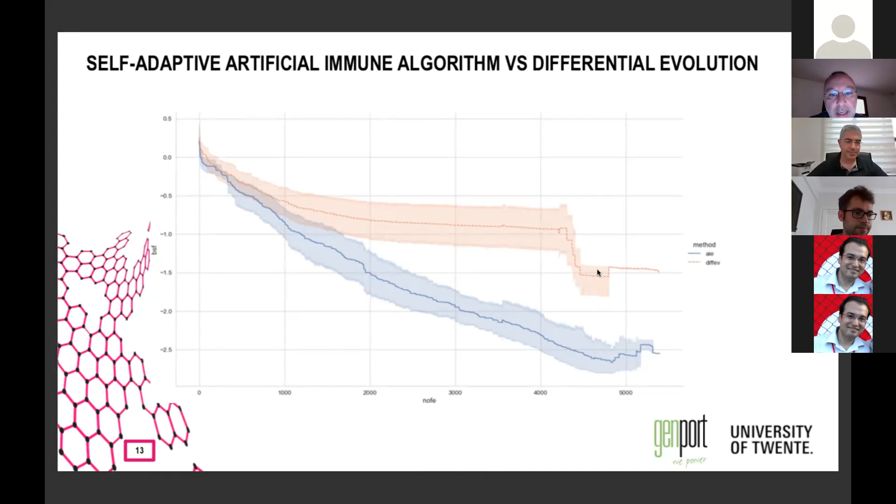Now, this algorithm has been utilized for explaining different scenarios that I studied, based on two different price policies for the energy exchange and product selling.

The so-called high policy, a scenario where the energy cost is a little bit higher than today, and the low policy, where the energy cost is like it is today.

The first scenario that I want to introduce is the advantage of interconnecting the two microgrids.

The mix of distributed energy resources optimized here is a combination of renewables, mainly fuel cells, and the main grid.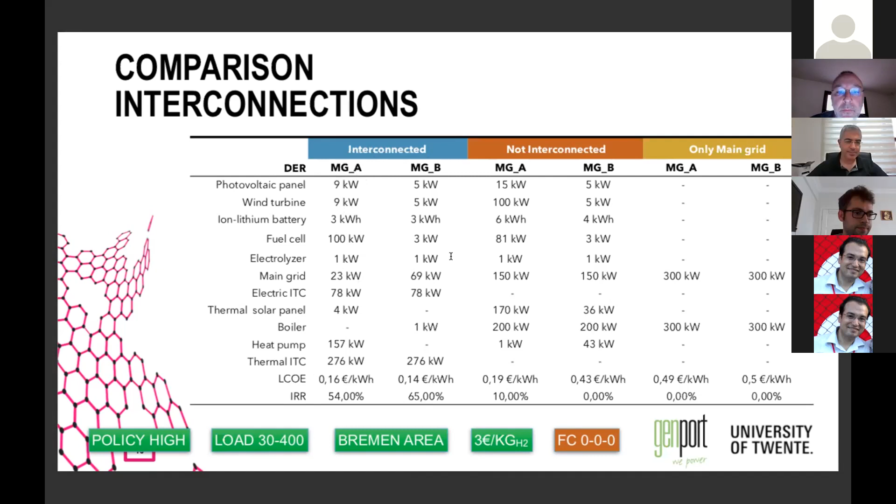In a second scenario, it's been shown how the price policy of hydrogen can have an impact on the overall configurations and results. Here you can see that with €3 per kilogram, it's possible already to obtain a very high internal return rate in south of Europe, in Catania, while in Bremen a similar result can be obtained with €1 per kilogram. Again, a good combination is obtained by combining photovoltaic and wind turbine with a fuel cell.

And the electric grid is always utilized to provide an energy demand response to the main grid. A third scenario analyzes which is the best siting, off-grid and on-grid, for both North Europe and South Europe. It has been found out that one of the best candidate areas for multi-microgrid is in north of Denmark, while for South Europe it's the east part of the Mediterranean Sea near Greece.

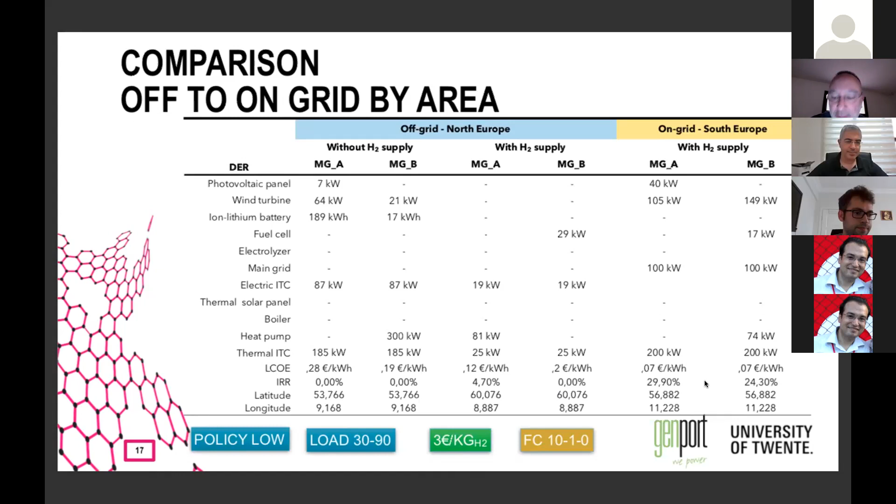Again, the best results are obtained in South Europe, where the efficiency of renewables is higher than North Europe. Finally, the fourth scenario compares technical economic results using green hydrogen, meaning hydrogen coming from a large wind farm, or blue hydrogen that can be produced on site with thermoplasma decomposition technologies. This latest technology has an advantage: it is quite green and can also produce carbon black, a good high quality product that can be sold to the market.

The results show that although green hydrogen is always the leading solution in terms of financial performance, blue hydrogen can be a bridge technology until green hydrogen is available for microgrid.

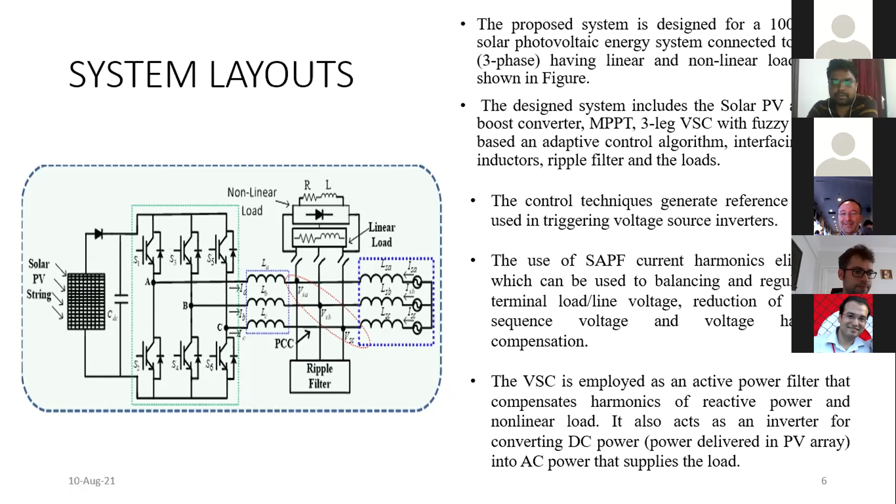Now I will talk about the adaptive control system. This is also integrator based, used to remove or eliminate harmonics from the load side. Basically, this is the adaptive control scheme shown in this figure. This is a basic control system which can be solved using a simple block set, MATLAB block set, or simple calculation.

Through that we can calculate the IFA for current extraction from the phase, this is for phase A. Similarly, we extract current from phase A, phase B, and phase C, since we are talking about a 3-phase system. Then we use one-third of all this current. Then W1, W2, W3 we take as the in-phase component, and WPA, WPB, WPC are the out-of-phase components. All these feed-forward components are used for dynamic performance improvement.

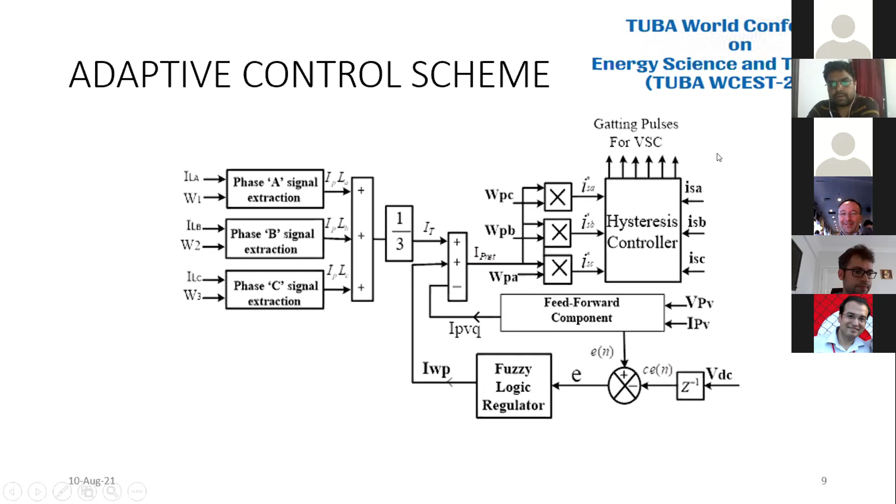Fuzzy logic controller is used basically for loss estimation of the VSC. With that we get the current ISA star, ISB star, ISC star, which we compare with the source current or grid side current for generating the voltage source converter signal. So we use the fuzzy logic controller for loss elimination in DC bus voltage, and to adjust quickly to the reference voltage. The DC bus voltage is obtained from the MPPT controller.

These are the simulation results under variable irradiance. You can see the irradiance will be around 700 kilowatt per meter square, then after 0.4 second it will increase to 1000 watt per meter square. We can see the grid DC bus voltage is almost constant. The feed-forward component is increased correspondingly. The PV power will be increased, the current will also be increased, and more importantly, the grid voltage and grid current will remain constant.

This grid current will reduce as the solar irradiance increases. This is the compensating current, this is the load current nature. We can see this is the grid power, and we can see the active power, and the last one is the reactive power, which is almost zero. That means the power quality will be improved, with good power factor.

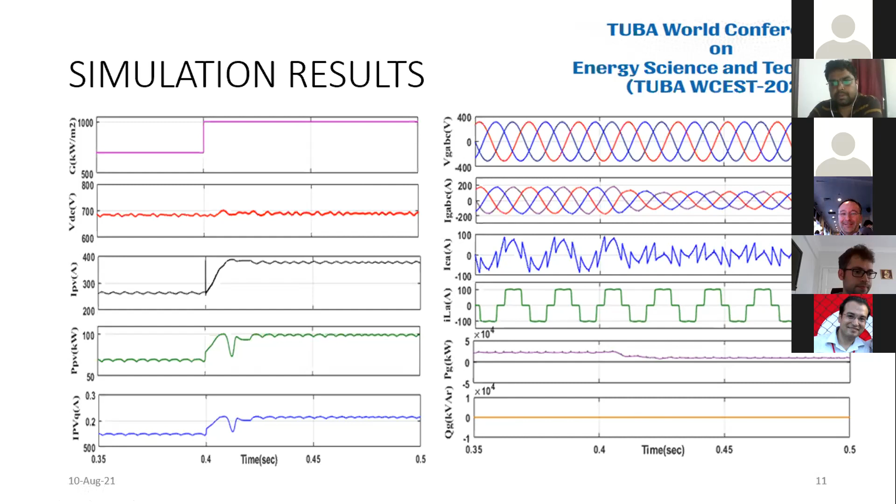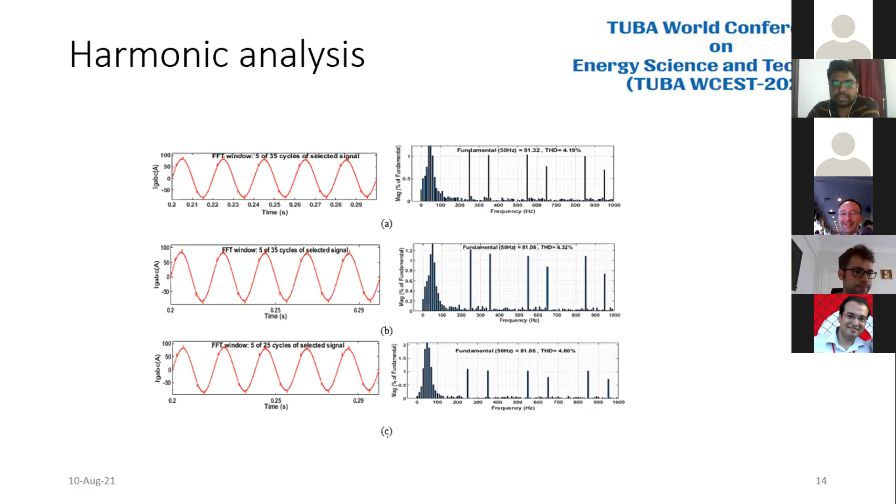We can see on all conditions we will do FFT analysis to determine the harmonic. THD will be present in the nature. So through that we can basically improve the power quality by the use of fuzzy controller. We improve the dynamic performance. So this is the conclusion.

A three-phase grid interface solar photovoltaic system is implemented and controlled using the fuzzy logic-based adaptive control scheme. This scheme has been effectively used for the extraction of reference current and providing gating pulses for VSC. This proposed control technique for solar photovoltaic system has been found satisfactory under the linear load and non-linear load, and under the conditions of load unbalancing, and under the system variable frequency.

The proposed system, along with fuzzy logic-based adaptive control system, has shown better performance in power quality enhancement. The effectiveness of the feed-forward component has been presented for dynamic performance improvement. The THD has been reduced very much using the fuzzy logic controller, ensuring good operation of the shunt active power filter and resulting in improved power quality. So this is from my side.

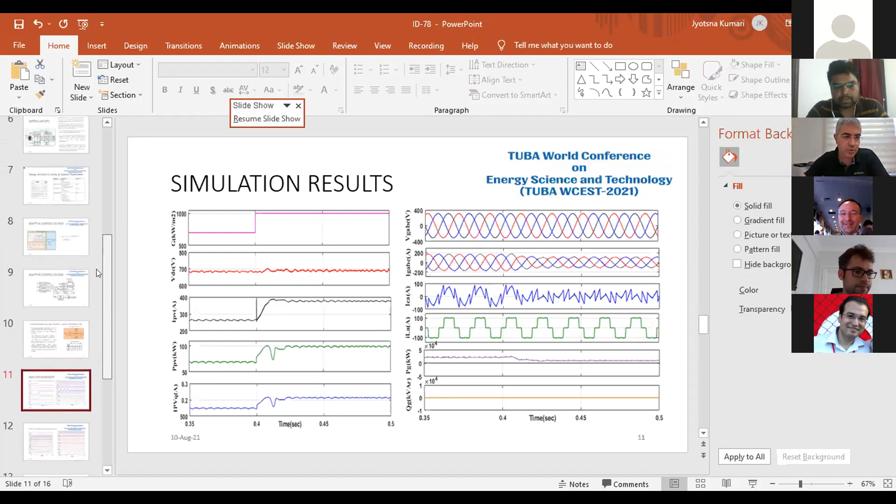That will be selected according to this formula, according to what are the ratings, what are the loads. Accordingly, we select all these components.

But did you use any optimization technique to optimize these parameters, or did you just use the well-known equations to obtain the capacitance and inductance values? As of now, I'm just using the equations and getting the results. Thank you.

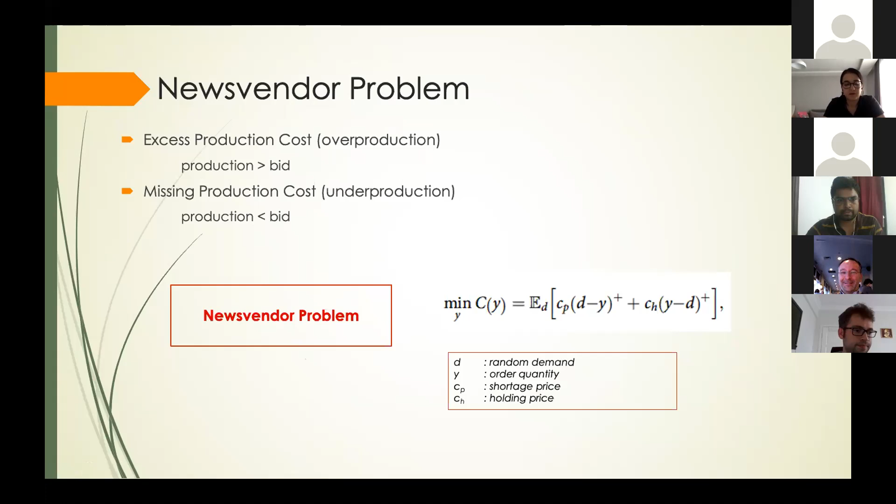Now I will briefly look at the related literature and the methods we use. Actually, there are 6 main approaches, but now I will mention 3 of them. First category involves forecasting demand and then directly using it as the order quantity. The second category involves firstly estimating the demand distribution and using it as the order quantity.

Maybe I may mention the fifth one. I'm sorry. In this approach, the researchers postulate that the optimal order quantity is related to the demand feature via a linear function.

This is our reference article. This is the last approach. They develop a new approach to solve the newsvendor problem with data features based on deep learning, and they use the newsvendor cost in the loss function in the deep learning application.

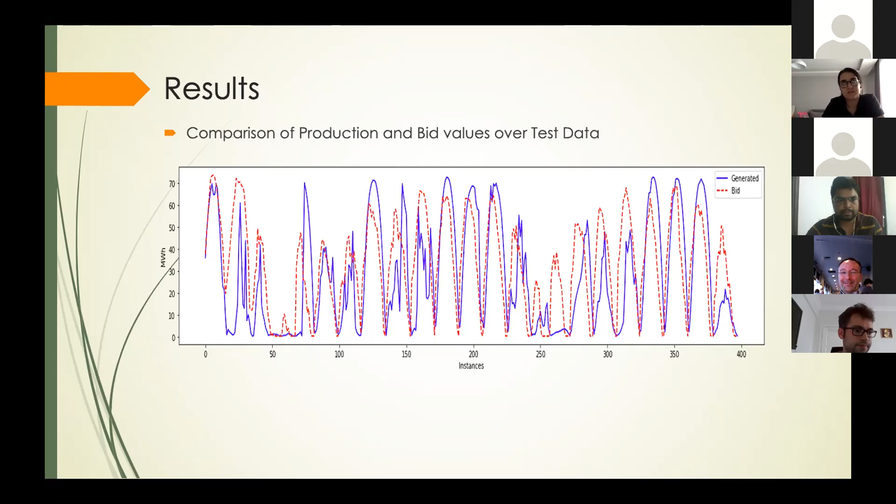We also compared revenues and we obtained almost 2% more revenue with the revised loss function compared to the mean square error loss function. And finally, I would like to talk about future works.

Firstly, we are going to tune our neural network because we have run the neural network several times and haven't tried different options yet. We want to try this and improve our neural networks. Secondly, our data does not include the summer months exactly. We think that we will get better results if we enlarge the data to cover the summer months.

Thirdly, we can increase the input variables of the problem. We think this will increase the prediction accuracy. And I think it's the most important one, the last one.

In this study, we use a revised loss function. There are many points where this loss function can be customized according to the electricity market. We have started working on this and getting better results.

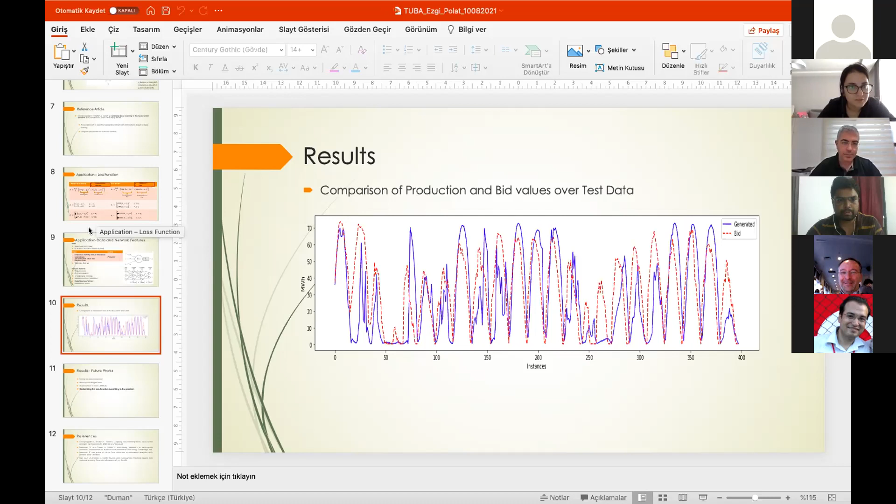Yes, actually, I talked about this one. Okay. Sorry, there's a problem with my screen. Oh, it's okay, we can see.

Okay, actually, if we use mean square error, we did try mean square error, but that is about the prediction of electricity production. But we are not interested in this. We optimize our bidding, our offer, so we don't make a prediction. We optimize our offer, and I don't know, is this clear? We did try mean square error, but this is a different topic. Is this clear? Yes, thanks.

Okay, is there a question for Ezgi? I think there is no more question. Thank you, Ezgi, and good luck for your future studies.